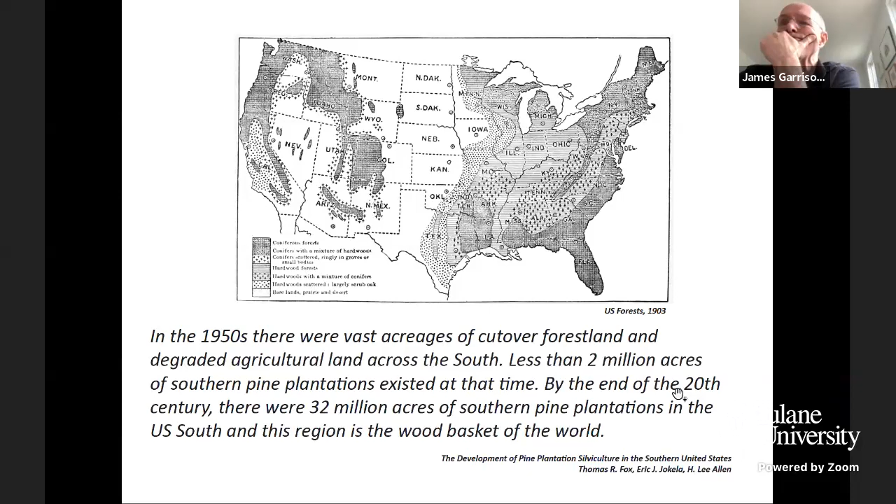But there are, of course, still challenges. And as many of you are aware, mass timber production had been located in Canada and the Pacific Northwest, as well as in Europe. But recently there's been a plant opened up in Dothan, Alabama, another one planned for Texas, and another for Arkansas, using southern pine. This is an enormously important thing for our region, which has historically been economically tied to extraction industries of oil and gas, with very little interest in carbon themes.

So clearly the confluence of this amazing natural resource and the amazing and critical challenges of the Gulf Coast, both in terms of climate and the economy, are sort of part of this. This slide shows some of the research that the students did, both in terms of understanding carbon sequestration, looking at various species and their coverage, also on silviculture. We also looked at some economic issues, which I think are important to be aware of, even though studio and architecture won't get as deeply into the economics as one wants to. Most of these forests are privately held.

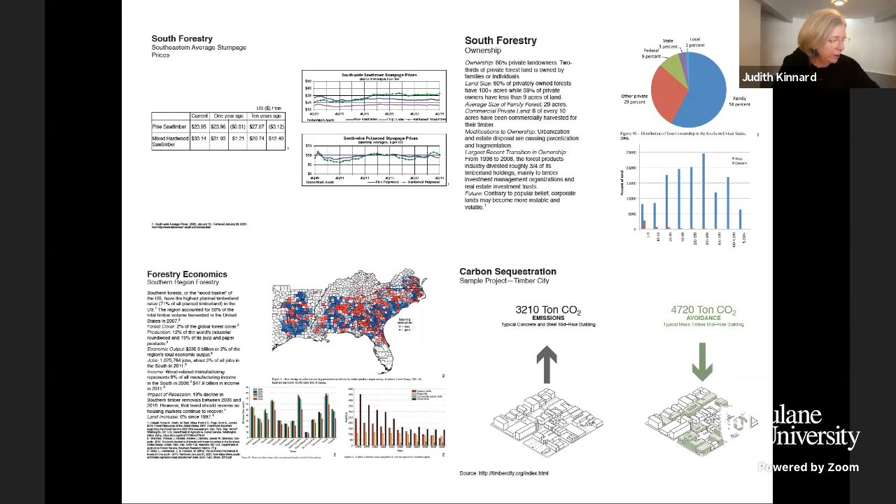So the hope is that mass timber, when it becomes more widely used, when incentives to make it more widely used start to exist, could help to stabilize some of those swings.

So the first exercise we did was a way of beginning to understand the system compared to the sort of iconic structural prototypes we're more familiar with. So we took some concrete houses, some steel houses, and even a couple of stick-built houses, and went through an exercise of translation—direct translation, and then eventually transformation—through a fairly rigorous dimensional lens of using mass timber, understanding it structurally, and in the last stage, one had license to make it really quite different from the original house.

Although I think the two examples—this is from Campo Baeza, a house in Spain, and this is a house by Sou Fujimoto, a house in Tokyo—both probably retain a fairly legible allegiance, although transformative in terms of many material aspects, to their original analysis.

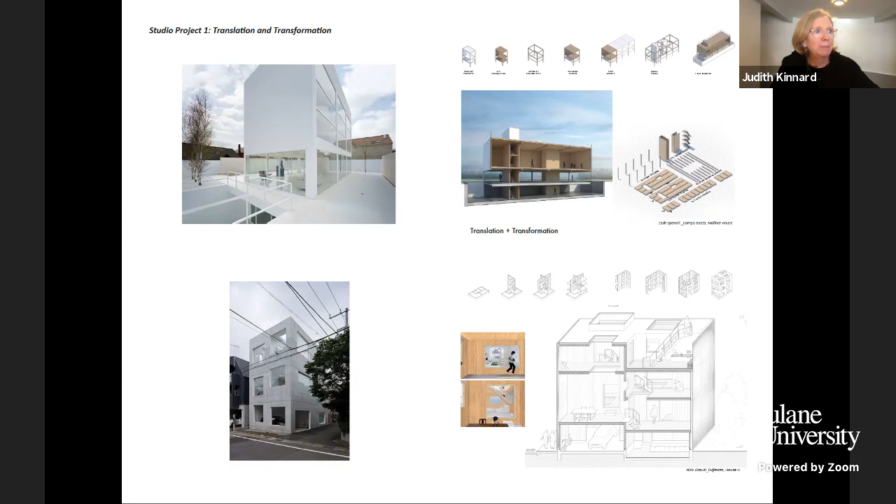We also had a couple of really helpful guest lecturers, friends who came to New Orleans, gave lectures, sat in on crits, and shared their knowledge with us, which I think I can speak for the students in saying was really valuable—Chung, who was the lead architect on the UMass project and also the Arkansas dormitories with Leers Weinzapfel, and Judith Sheine, who directs the TallWood Design Institute in Oregon as the director of design.

So in thinking about why mass timber in the Gulf South, there are those issues, but there's also something inherent in the material: the issue of time, and how, if you're going to sequester carbon, you manage to keep it sequestered for an adequate duration, how you deal with both the technical and biological aspects of forestry, and think about the life cycle issues.

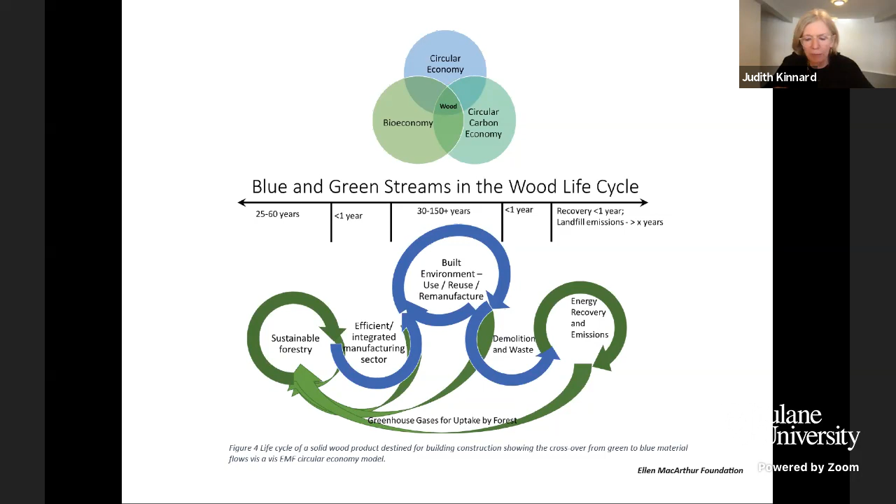But I was struck by an analogy in the history of our city. Throughout the 19th century, particularly the first half, farmers in the Ohio Valley would build these boats out of 2x12 pieces of oak from the forest. Those boats were designed to go down the river and never make it back up—they were dismantled and the lumber was sold, and our city was built out of that.

So many of the early houses in Louisiana, probably broadly, but certainly in New Orleans, were barge board construction—2-inch thick walls, no insulation, with cladding on the outside, no frame. That still exists in parts of our city, and it's an example of a resource that has now been intact and in use for over 100 years.

So it seems like a theme that can be seen in contrast to the situation in recent disasters in our area, where these mobile units end up scrapped after a year of use, maybe sold for a pittance, and whose material qualities are not necessarily healthful or environmentally sound.

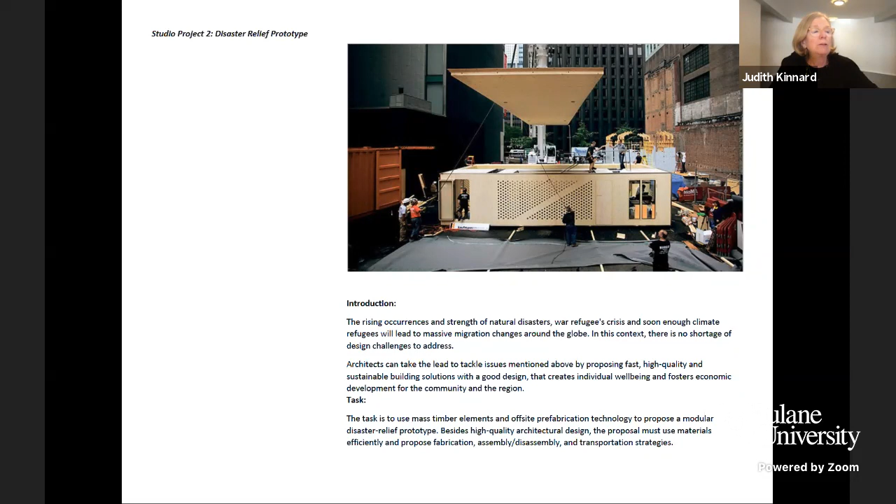So for the second project, after all of that analysis and research, right around the midterm we started this disaster relief prototype study. We initiated it with analysis of both small scale modular and flat pack units, and larger aggregates of flat pack and modular units, mostly European. After that analysis, students were asked to develop both a prototype and a scenario that takes into account the issues of initial use, reuse, and themes of time, as well as material.

You'll see that we scratched the physical model off that list, because by the time we really got into this exercise, we were in post-COVID remote teaching mode.

The themes of the studio originally were intended to be economic. We were intending to do rather specific costing, and there was a desire for some quantitative analysis, but it became clear that wasn't going to be easy, aside from the fact that it would be difficult to do accurately. No way is CLT going to win a cost-benefit analysis. Well, maybe a cost analysis, arguably a benefit analysis, possibly.

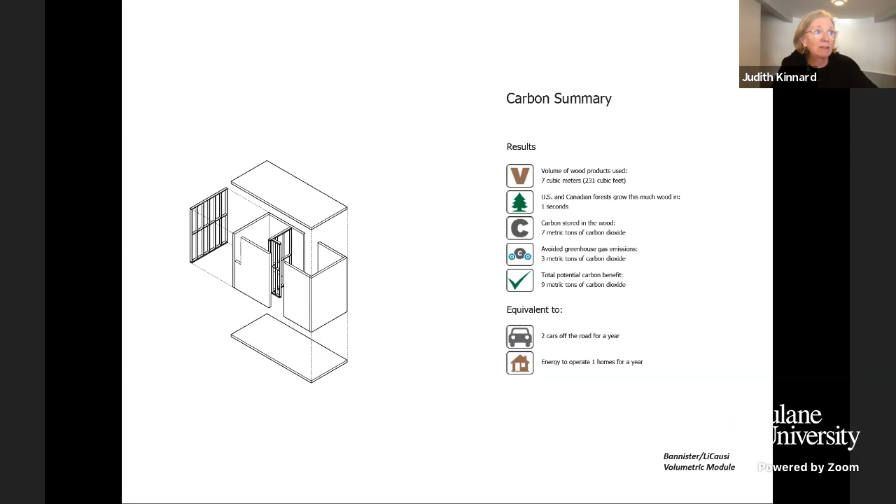So we did go through the carbon calculator for the various modules that people created. In a sense, through this analysis, it's valuing quantity in a way that usually you try to make buildings efficient by minimizing the amount of materials you use. But through this calculus, you're in a way creating an approach which values mass. And that seriously upends the equation that was prevalent in much of the early part of the 20th century.

And arguably in some contexts today, but it certainly brings a series of questions into play about what the metrics are, beyond the design metrics we associate with quality of space, in terms of what the metrics of cost and the metrics of benefit are. It brings a whole series of questions into play, which I suspect will come up today.

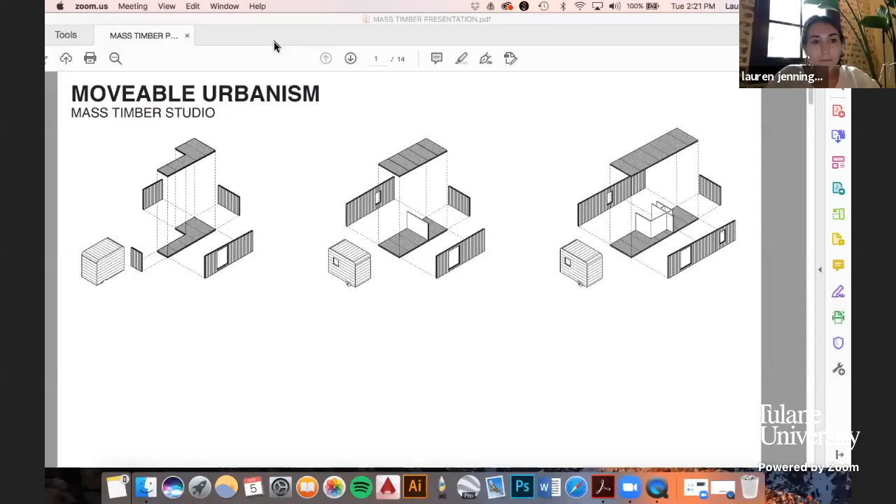All right, so my concept was movable urbanism. When thinking about this material, CLT, and disaster relief scenarios, I really tried to focus on how people can be relocated swiftly and how this material can be used over spanning timelines of short, midterm, and long-term solutions to disaster relief.

So when looking at the short-term needs for mass housing, the timeline and occupancy were very important factors to consider. Beyond immediate deployment, these relief units could also serve as long-term investments or until homes are renovated post-disaster. I chose working with a flat pack, which is what this diagram is, because it's more dignified than a disaster trailer, I believe. As Judy just showed, many of the materials aren't very healthful and a lot of them are just scrapped, which is very wasteful.

So the unit intends to accommodate and adapt to everyday needs in every phase of disaster recovery, and that is what these 3 units show at different spaces. This next slide shows the approach of the 3 dwelling prototypes and how they're designed to be compacted or extended, depending on the occupant's needs or site restrictions.

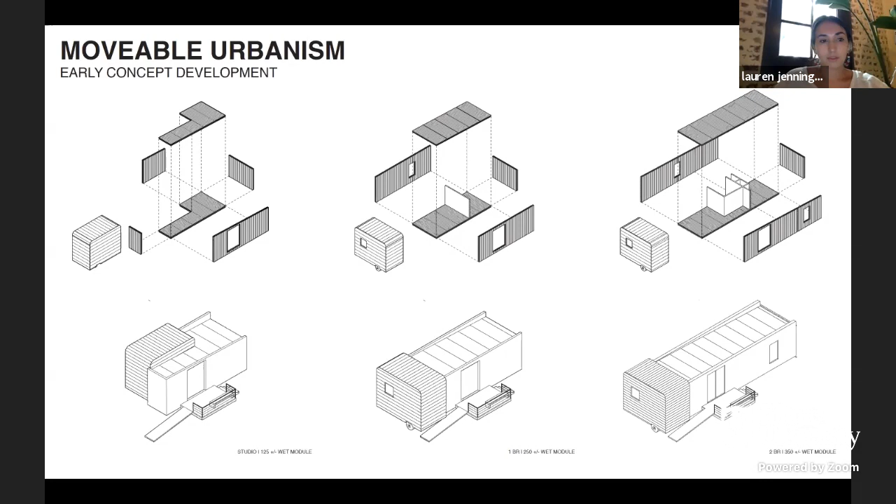And to completely transplant disaster victims would separate them even more from their familiar resources and opportunities, which could, as a result, create more problems than it would solve. Additionally, site limitations include and require electricity, water, wastewater access, and site access from existing infrastructure for proper deployment.

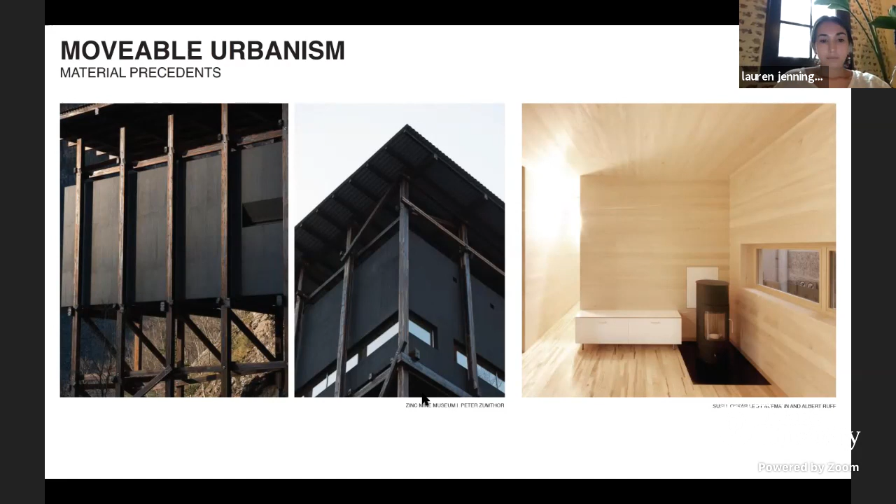The windows were thoughtfully placed to provide privacy if this ends up in a more public suburban space like a parking lot temporarily, or even if units are closer together, say permanently, on a private lot that's turned into multiple units.

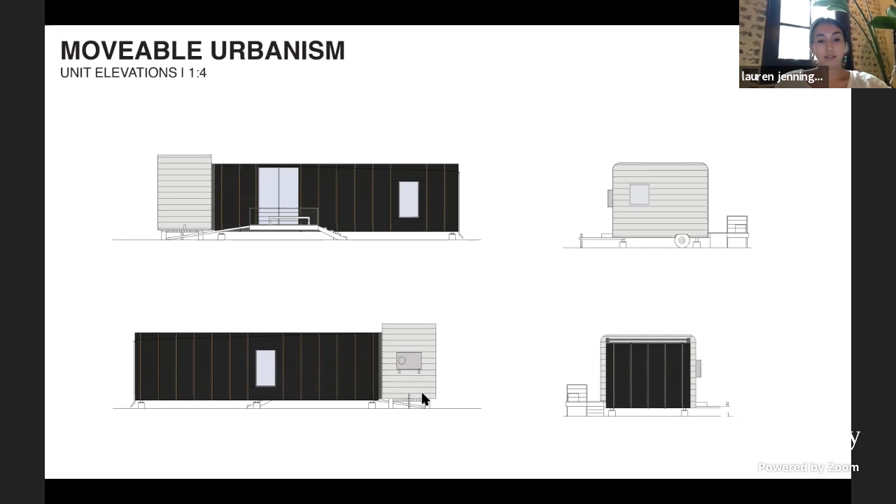This is the final slide, and I chose it because at the beginning we talked about how it was used to assemble these disaster relief modules, but it also reveals how the flat pack and the wet module can be transported again for reuse as a trailer.

That was the last slide, but I have a final video to show just to further explain how it is assembled, each layer.

And that's the wet module coming in on its own.

Oops. Okay, thank you.

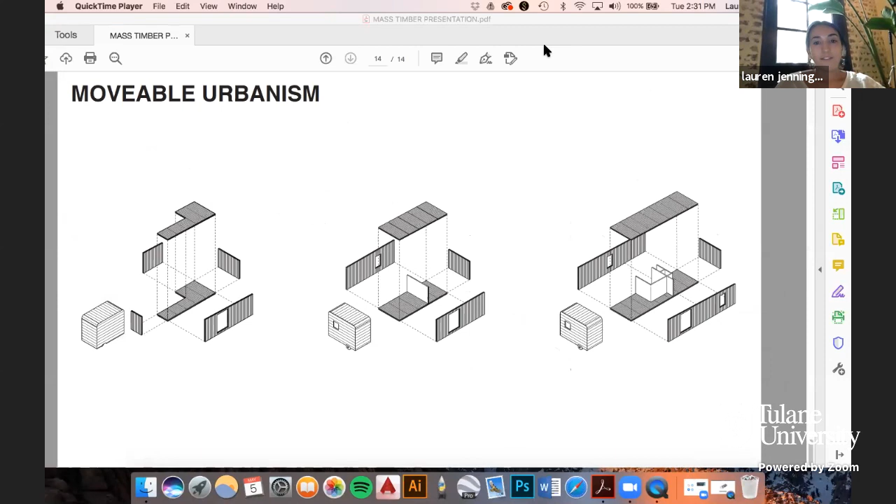Great. Thanks, Lauren.

Well, thank you so much, Lauren. I'm happy to jump in if nobody else does.

It's a real pleasure and a delight to see this studio unfold as a whole. I think the initial premises of the studio were really exciting for me to see. And I'm trying not to have my house included as part of that discussion, but just to see how the broader approach to the Southern Pine question in the South has been taken on and thoughtfully identified is really critical, because it's an emerging topic. I've been on a couple of studios in the South, and it's not often gone into as much depth as into the forestry plantation questions and the carbon questions as you all have. So I was really excited to see that as a whole.

Regarding the projects, it's just a delight, Lauren. This is a very thoughtful project. It seems very complete. There's a lot of care that's been taken. I was thrilled to see the wall sections, for instance, in the work there.

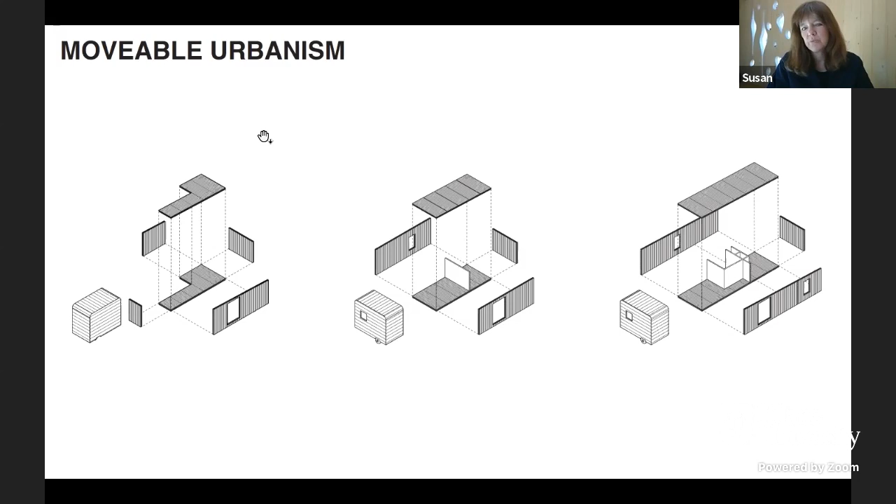If I had to start at a broader premise for your project, Lauren, I would have to question and ask you to expand upon the movable urbanism quality of your title. Maybe that's a bit of a red herring, perhaps it got you into some difficulties that you didn't anticipate, but do you really think your project is movable? Perhaps you were getting at that with that last slide in the video, but if you could expand upon that topic, I would appreciate it, because there's a lot of very good permanent construction or semi-construction about the project that I could talk about, but it's the movability part that's got me questioning a little bit.

Okay, yes, that really had to do with the ground connection and thinking about how flat pack could be moved. It was really between flat pack and modular, where a modular system could be placed on a truck and transported. But as a whole, it seemed a little bit more similar to maybe a FEMA trailer, where that's less personal, and that's something that multiple families have gone through. So having that same system that you might use in an actual disaster recovery scenario, deconstructed and then moved onto a different site, was something I considered for how this system would work. Here's that section that shows how the ground connection would not affect that temporary placement in a more public lot, thinking about how you're going to affect the space and how that would ease transport.

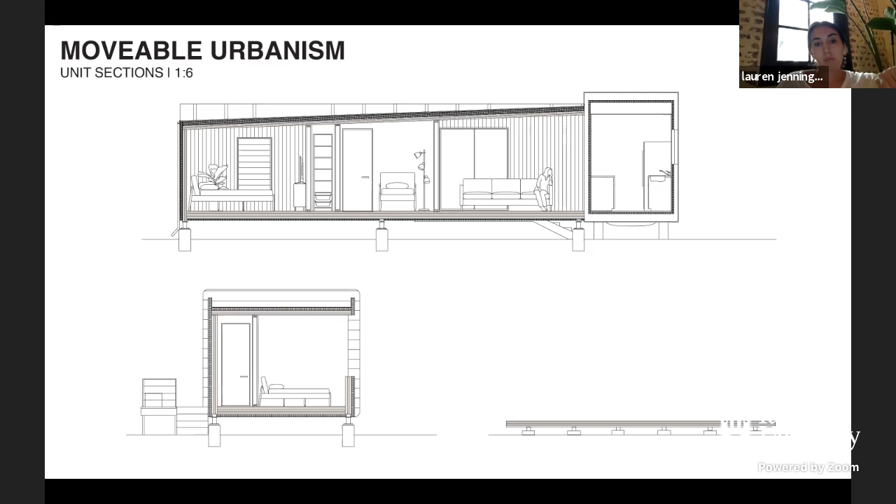Thank you, I agree it is a very nice project. But just on that last comment, it seems like the basic formula to do any kind of long-term analysis is the length of service for this, as you make a point of. So it becomes so important because the more material you use, the more carbon sequestration you're able to accomplish, and there's some value in that which gets cut off at the knees when it has unexpected ending points.

And the Katrina Cottage is a clear example of that. There was no thought about how to use it after the immediate emergency, and so we have parking lots full of those things. So certainly disassemble and reuse for its same purpose, but it also seems like there's a real opportunity.

To just continue to add on to this, to think about how you're setting it up. Maybe it's in the backyard of someone else's property, but also maybe it's on its own property, and someone in an emergency situation could be gifted this, or through some kind of service, and then be allowed over time as they reestablish their economic base to add on to that, to actually make this work. Because the beauty of mass timber is the material is of such quality that it encourages one to hold on to it, to take care of it, to last through that. So find ways where you can tap into that unique quality of the material and capture the one thing that could be unknown, which is the kind of super longevity of it.

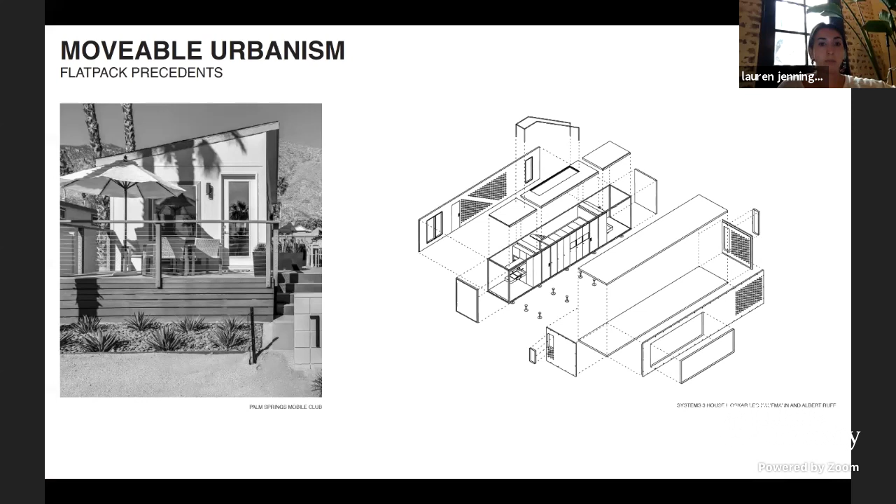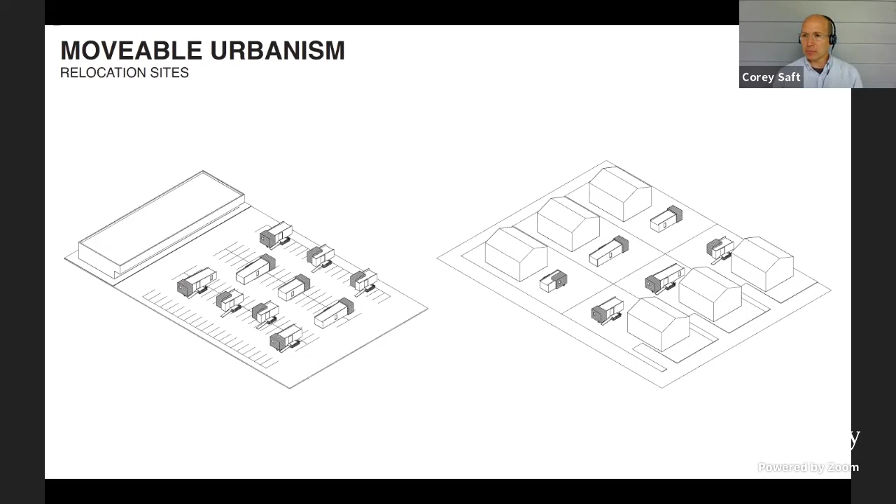Right. And that's a conversation that extends beyond disaster relief too. It does seem like the movable idea of your urbanism is, at least the way I'm starting to think about it, to always have a plan B. When something goes wrong, this thing has the capacity to rearrange itself, reconfigure itself. Might not be easily movable, but it's certainly movable in some time frame.

Which I think would question some of the assemblies for the insulation. When you look at the entirety of the project, you have this thing in a way—you have the mentality that the architecture is in some ways flexible, essentially assembled into an urbanism that is now more nimble. But I think you have to go back to the materiality and push on some of those components that are maybe problematic to the balance of embodied energy and high grade energy materials that are unable to be reused once deployed. A lot of those happen to be the insulations. So if the scale of materiality or the architectural form making has an agenda within the context of its full assembly deployment, I think you might find that the insulation is now your target.

I think that's a really great point, Corey, because once you start digging into that idea of disassembly, it's not just about the connections between these big, sturdy mass timber panels, but when you attach a mineral wool that goes screw-based into the mass timber, there's a lot of penetration happening also in the waterproofing detail. So all of that has to come off, and yet you still need that to protect the mass timber from weathering. I think it's interesting—if this climate of the South doesn't necessarily need protection from the cold in the same way, there may be some less insulative qualities that are necessary.

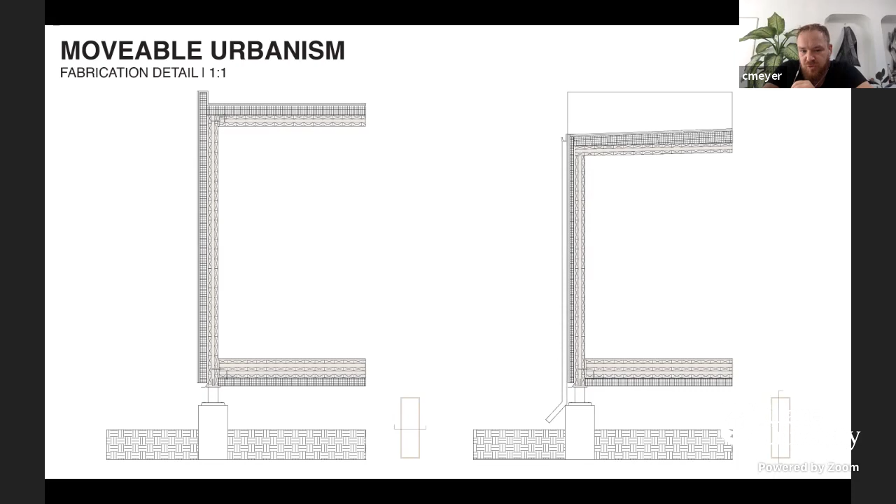I think that's the nature of the timeline, which is very exciting, and I think it allows for maybe one or two of these moments to be explored without being shackled to too many agendas. It's a great point in terms of how much we can really ask of this architecture. I'd point to interrogating the timeline relative to the objectives and intentionalities of the work, maybe limiting it to only trying to solve one or two types of goals. That gives you some leeway to develop a couple inventive or exploratory scenarios, which is actually helpful in school, where you're free and unshackled from that.

I agree. You're going to see a few different approaches to this, because the issues you've all brought up have been confronted by everyone in a variety of ways. I was trying to imagine how you could strap the insulation on without having to screw it in, with these big barrel vaults of things you could do on 16-inch centers or something. But in any event, if there aren't any more comments, we can move on, or if there are some other thoughts before we do.

I have just a couple more detailed thoughts. If we go back to the wall section, it seems like your parapet's built out of the insulation, and that might have some issue. And the platform framing of the floor system, it seems like just how that's attached — if it is like that, it'd probably need some more steel in there than the nails and screws.

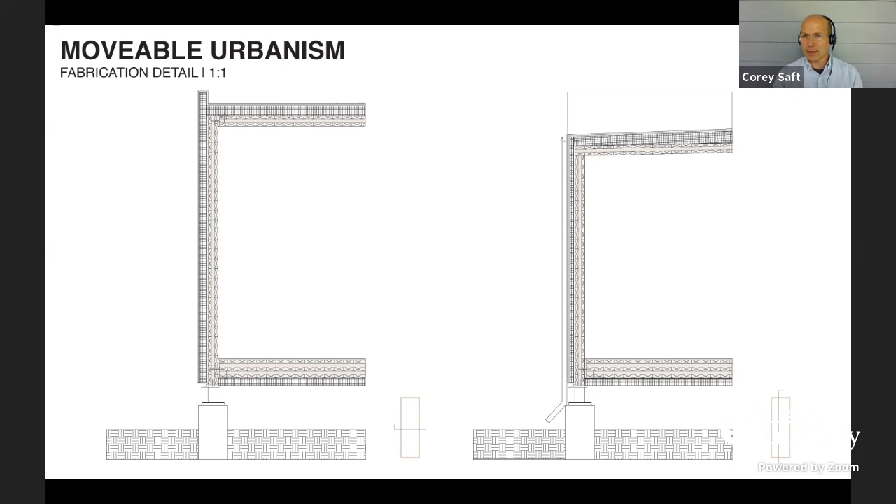The last thing is water management. It seems like there's more opportunity here, since you have this single-pitch sloped roof collecting all the water into one location. If that was reversed, so it went to your wet center, and the roof became some kind of cistern-like collection system, that would both slow down heavy rain before it goes into whatever system it's going into, and also give you a gravity-fed system for other activities. You're already working with water in that area, so in a way, make the roof its own gutter system.

That's an interesting idea, I love that — it gives you some opportunity. We had it sloping to the shorter end, but we eventually decided to maybe cover the entire roof with parapets and go to a gutter. So that's a good idea, I didn't consider that.

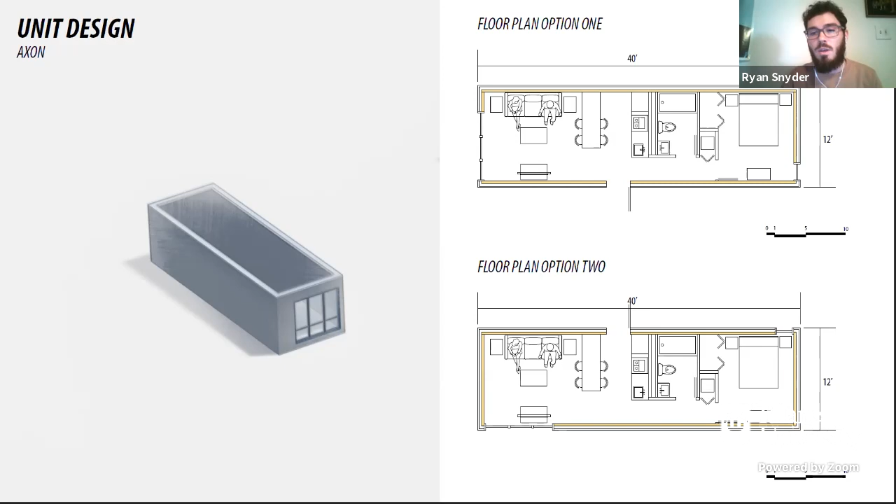I'll zoom in here to the plans. I'm also carefully placing these apertures on the ends of the CLT panels, highlighted in that tan color, to optimize the CLT cuts and avoid cutout windows that essentially waste the CLT panel.

In the elevation, I'm also utilizing floor-to-ceiling windows to make that full cut rather than partially cutting out of a panel. Here in the section perspective of the unit, this is the more vertically facing option that could even allow for some cross ventilation as well.

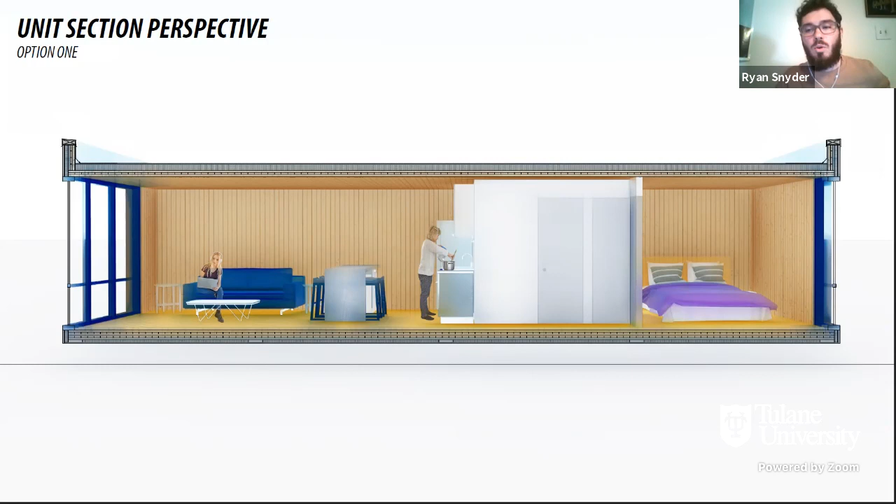As a precedent, I was really inspired by the post-disaster prototype by Garrison Architects. Obviously, James Garrison is here.

I selected this as one precedent to look closely at because the size of the units, as I specified earlier, were already made to be transported, and the apertures and windows were already using floor-to-ceiling height windows, which when converting it to CLT really made sense to study this unit.

Looking into some different scenarios that this unit could be deployed, obviously it could be deployed in a more singular fashion or in a row, more row housing fashion, and then getting into more aggregated and stacked ideas.

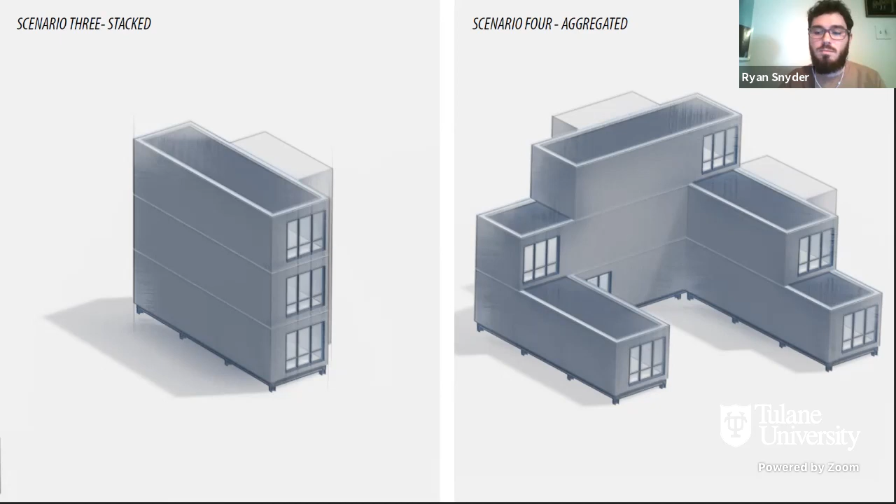On the left, a very similar scenario to the Garrison prototype, and on the right, utilizing those two different unit types to maximize a little more irregularity in the aggregation. So getting into the fabrication, I was thinking of these units being assembled in a factory, not as a flat pack.

Thinking about the post-disaster context of this project, I thought it was more important to have these units ready to be shipped out, really trying to minimize the construction process on site so that the deployment of these modules would be a lot quicker compared to a scenario where the project has to be built on site.

For transportation, this module takes up about almost all the space that a truck could use with an oversized load, really taking advantage of pretty much all the space that can be offered with the transportation and utilizing the standard CLT panel sizes.

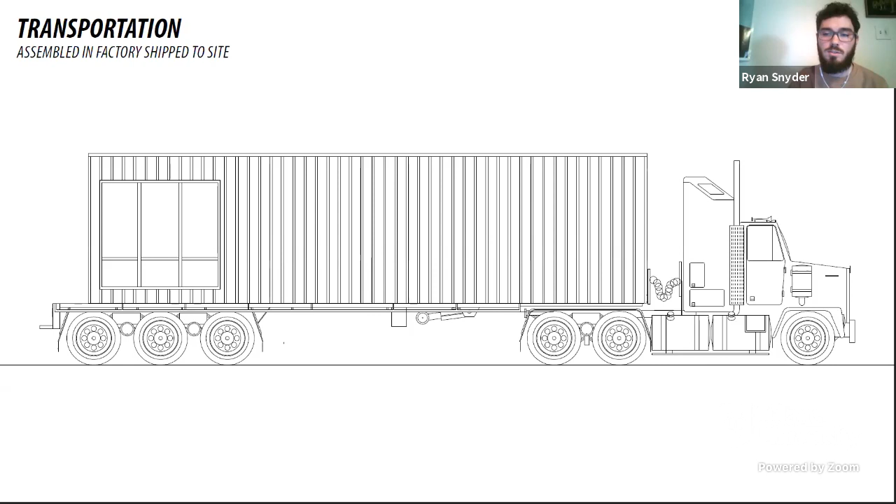After that, I began to think about different sites or contexts that these units could live in, because it's already been pretty well researched that these could live in a standard lot. So I began to think of different sites.

I landed on using stadia due to the existing structure and existing facilities that already exist in a stadium, such as electricity and plumbing.

We've also seen these sites become less used over time. There's a certain lifespan to these sites in stadiums, and there's always a decision about what to do after the stadium becomes vacant, essentially.

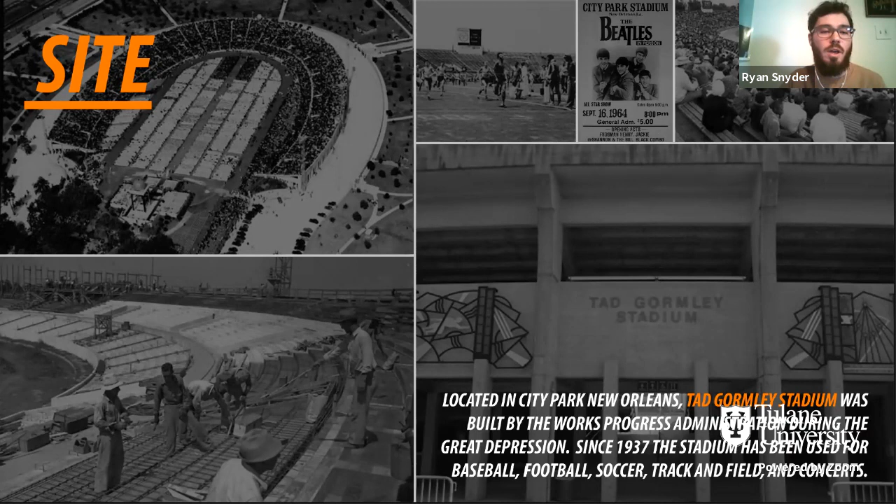Two, the concrete structure of the stadium allows for more weight to be added on than maybe a steel structure. The third reason was this open-ended stadium and access around the stadium provides easy access for construction and entrance into the site.

And then just some overall information: it's actually a state-owned stadium, and it was built during the Great Depression era by the Works Progress Administration. So thinking about how this stadium was once used to kind of get the economy going back during the Great Depression could again be used in a similar fashion after a disaster.

So here is a video that shows the aggregation. I started by focusing in on the entry points to the stadium, and then stacking these modules on top of each other.

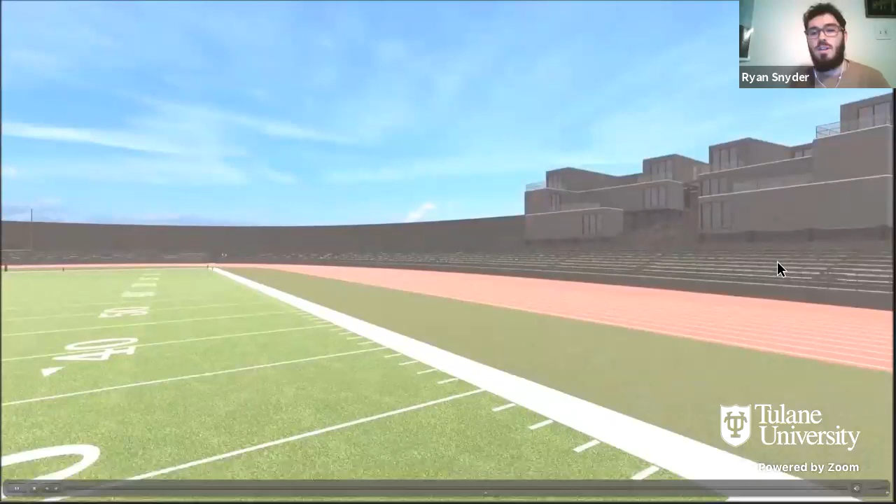As you see here, that allow for outdoor spaces and decks for units that are sitting on top of each other. And once I created a kind of standard grouping of these units, I then just kind of arrayed these around the stadium to fit that elliptical shape.

I'll play this again real quick. So again, focusing in on that entry point and kind of building the group of these units around there, kind of in a sense, creating smaller communities inside a larger aggregation of these units.

And then, as I said, arraying these around. And then the final phase is kind of transforming the field into a more communal area and an area that can be used for water management.

I don't know why it's, hold on. For some reason I had trouble going to the next slide.

As you saw in the video, utilizing that circulation down the middle and trying to pull these off of the existing entry points within the stadium.

Using this kind of vertical circulation through those entry points, and then horizontal circulation around on that kind of second tier of seats, and then again at the top, and then providing some stairs and elevators around that top circulation that can be used to provide an entrance for disabled and people that cannot use stairs to get up.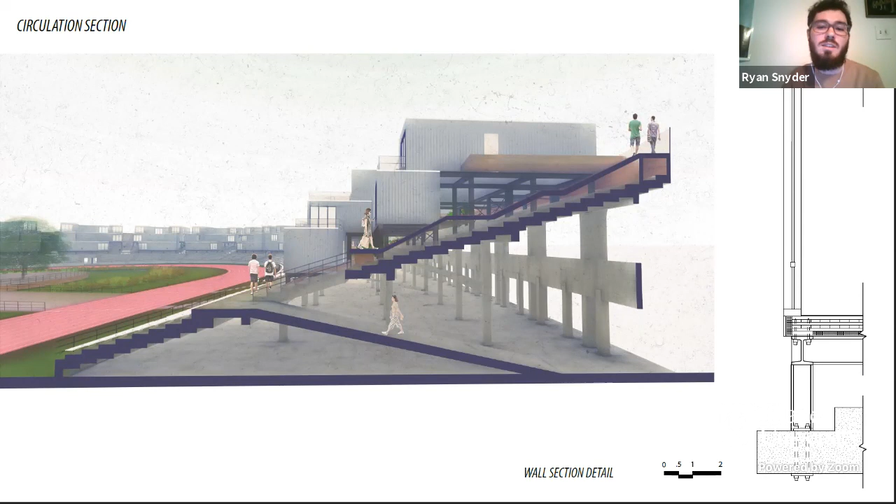So rather than trying to come up with a unit that could maybe sit on these steps individually, it made more sense to make steel frames and then sit the modular units on top of those frames and the units above. This is just showing the circulation and access into those units.

And then to finish everything up, just a few perspectives of the project. Here would be from that kind of mid-level of circulation. And then on here, showing the community space out into a little bit of the elevation of that grouping.

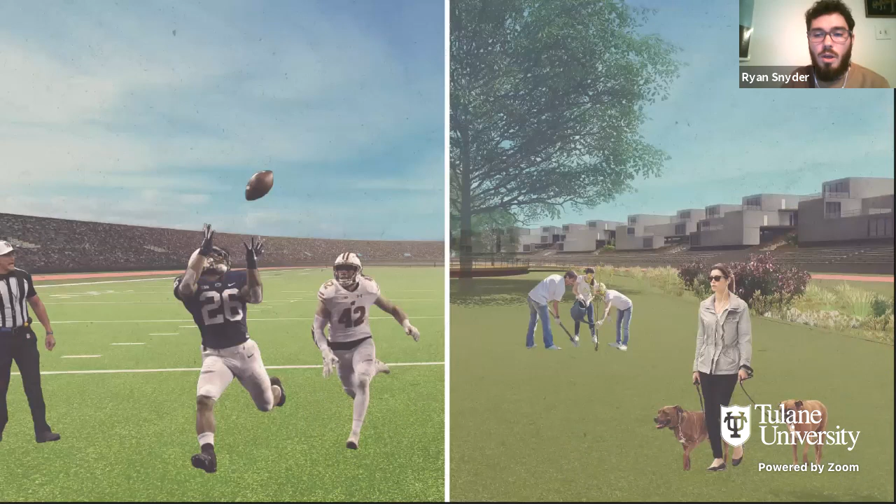And then as a final image, showing that juxtaposition between what this site once was and possibly what it could be. Thank you.

Well, Ryan, that's really fun. That's really something.

You know, what I really like about your proposal is that maybe without you realizing it, I'm not sure, but I think you probably did, is that you've tackled the necessity for infrastructure for any of these kinds of projects that you would need to deploy, right?

And when we think about prefabricated buildings, which we do a great many of, we usually think about a kind of 50-50 split between the cost of the building and the cost of the infrastructure. And here you have a kind of infrastructure waiting for you. That's quite an interesting thing you've taken on.

The thing that I wonder about is how far you could take it. I mean, presumably these are pretty robust structures, they probably can take quite a bit of weight. I'd love to know how much they really can take. I'd love to know if you could make your housing more dense rather than make it so porous with so many courtyards. I wonder if you could start to really capitalize on all the concrete that's out there.

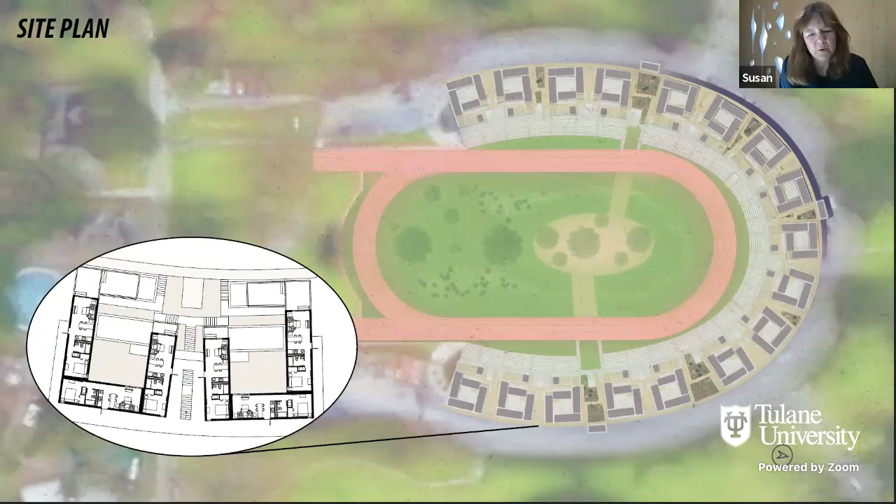And I think there's some real opportunity there. I can see in your big plan you've got some overall areas at the entrances, there's some community gardens potentially, but just that little spot right outside my window to grow basil, something like that, is really valuable for these kinds of homes.

It's just, when Judith was talking about this business of weight, the old 'how much does your building weigh' Buckminster Fuller business, I couldn't help thinking about that a bit. Because if you're building out of a material that soaks up carbon, well, it might make sense to use more of it, right? But the other side of it is that when you make weight, you make all kinds of problems for yourself.

And I'm thinking about Singapore, I was recently in Seoul for a housing conference, a modular housing conference. And the Singapore government was there, and they said, well, we refuse to make our buildings out of anything but concrete. So we're making modular concrete buildings, and we're making them 50 stories tall. You can't imagine how much trouble they were having. They couldn't find cranes, they couldn't get foundations deep enough. They just had horrible problems.

And when you make something heavy, you have to move it, you have to hold it up when it gets to the site. A lot of negative aspects come with weight, I think, when you're building in these dense conditions. So I wonder about that.

And I also wonder about the way we use CLT, particularly in something like this, where you have point-loaded conditions. Something that's been evolving from our research work at Pratt, we've been using CLT as infill between steel frames, among other materials, to look at ways to simplify connectivity, simplify the manufacturing process and the assembly process. This idea of hybridization, which goes counter to the modernist ethic of literate material use, let's say, is really an interesting question with everything that's on our plate these days.

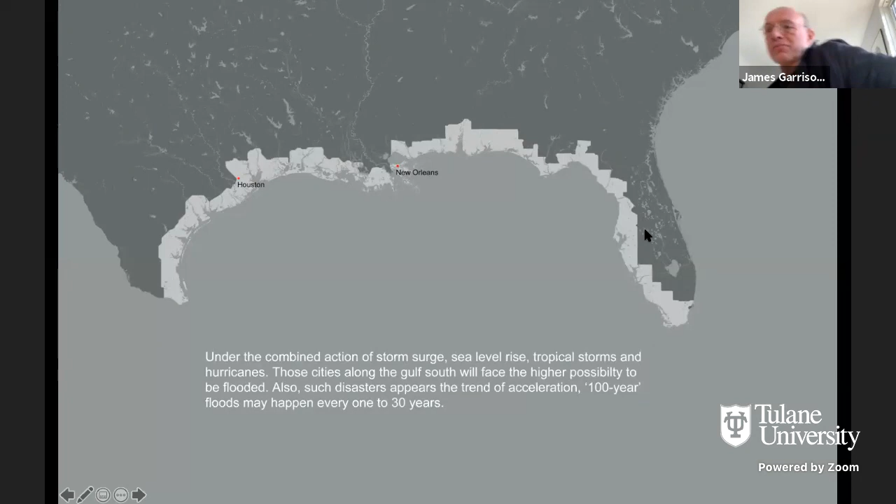The second slide shows the flood map in the South Gulf. Under the action of storm surge, sea level rise, tropical storms, and hurricanes, the cities along the South Gulf face a higher possibility of being flooded. Also, based on research from the University of Pennsylvania, 100-year floods will happen every 1 to 30 years based on temperature and weather changes.

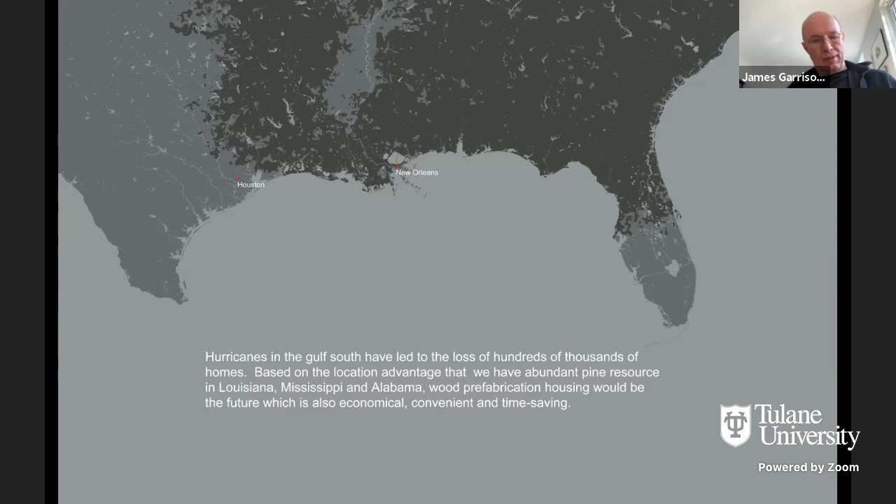This diagram shows the whole route for the project. We get the material from the pine forest, also make the CLT panel in the factory, and transport it to another factory to make the modules. I also chose the sports field to be my site, and after that I will donate the housing units to the homeless shelters.

In this way, I want to say we will take the CLT panels to be prefabricated in the factory, because we are doing disaster housing - it's kind of an emergency situation. So construction time is very important, and prefabrication will save a lot of time.

I see the sports field like in the campus or maybe in other areas. Schools were shut down during the hurricane times, so we're gonna make full use of the space. I will place the modules, the housing units, in the sports field. Our disaster housing is very temporary, so when the school is coming back, we can move the housing units and donate them to the shelter house.

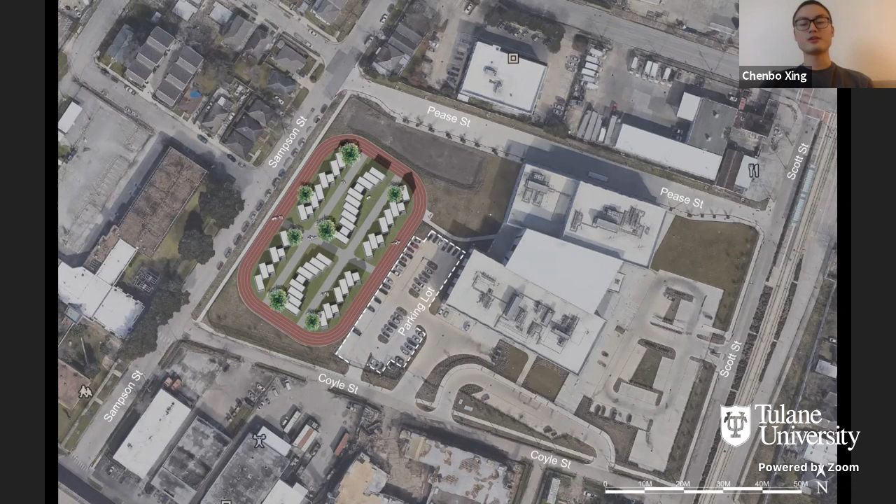The first point is I put the housing units in these directions so I can get some green space, kind of a semi-open space, which is the connection between the public space and the private space. The orientation and direction of the housing is also based on the site itself, because we have a parking lot on the right side, which is kind of a gathering space.

A lot of people will be there, so I do not want people to have crossed sightlines. So I made the direction this way. Also, I don't want the people living there to have crossed eyesight lines, so I put the middle line of the housing units in this way.

That's the analysis about the housing units. This next one is a fly-through video of my whole property.

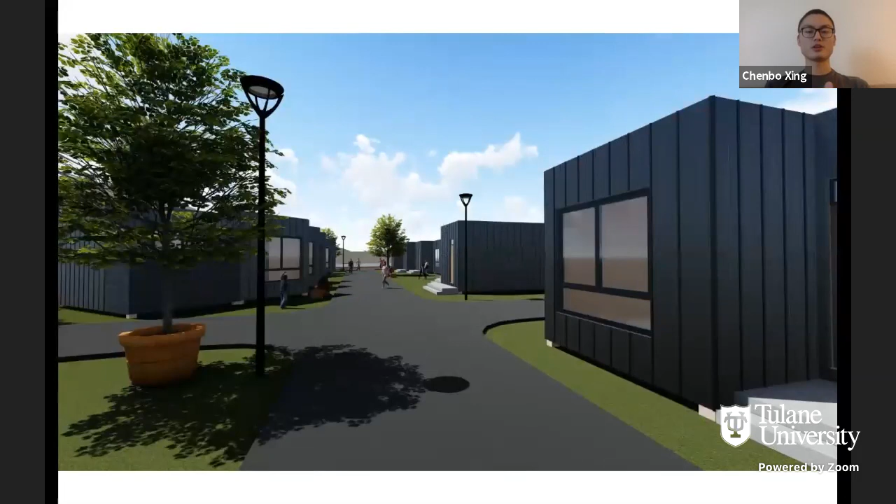Also, the housing units are not attached to the road or in the same line—placing them in different locations creates some green space or gathering space for people living there. I think when people are living in disaster housing, those kinds of units can offer a space for gathering and talking, because they do not have a job or school, so they have more free time.

That's it. Next slide shows the modules. This is the first module, and also the exploded view.

The first module plan is very close to a hotel plan, which is very space efficient. The living room and bedroom are very combined—you can see this is a mattress fixed on the wall. During the daytime it's a living room with a sofa and coffee table, and at night the mattress is laid down over the sofa and coffee table, so there will be a bedroom.

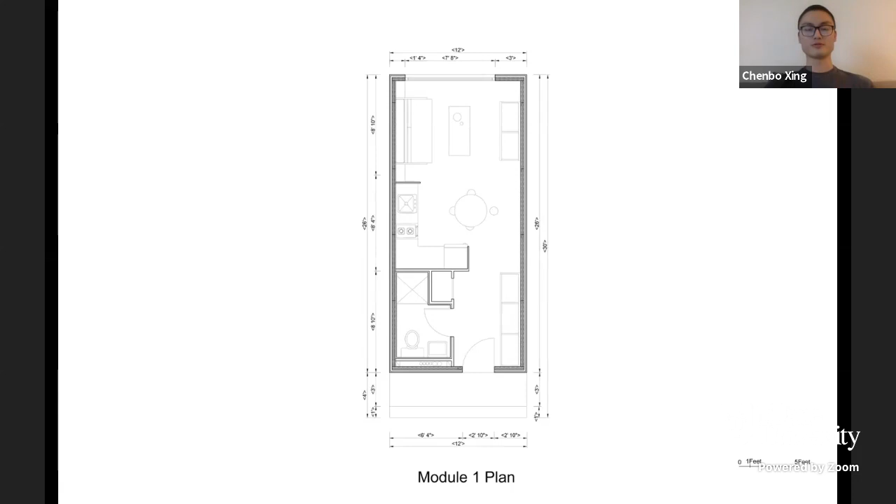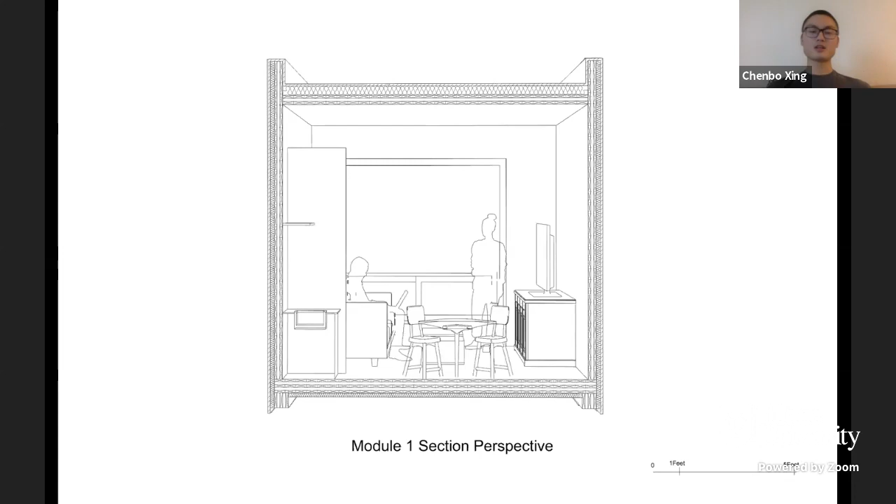This is a section perspective showing the activity in this space, and this wall separates the kitchen from the living space to prevent oil or water from spreading.

This shows the fabrication of the module, using 3-ply plywood for the walls and ceiling, and 5-ply plywood for the floor. The 3-ply plywood would be 17 panels, with total usage of 1,224 square feet, and the waste for doors, windows, and others will be 154 square feet. The plywood for the floors will be 5 panels, with total usage of 360 square feet, and waste of 48 square feet.

This next slide is a carbon summary for module 1. The whole unit for module 1 is about 12 cubic meters of wood, equal to 3 cars off the road for a year, very similar to a home operating for 1 year. The whole unit for CLT weight would be about 13,700 pounds, and the cost for module 1 would total 38,000.

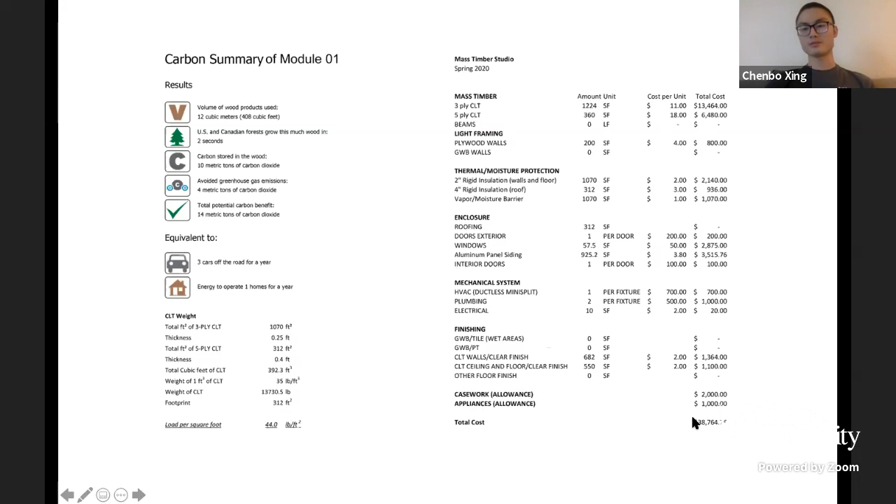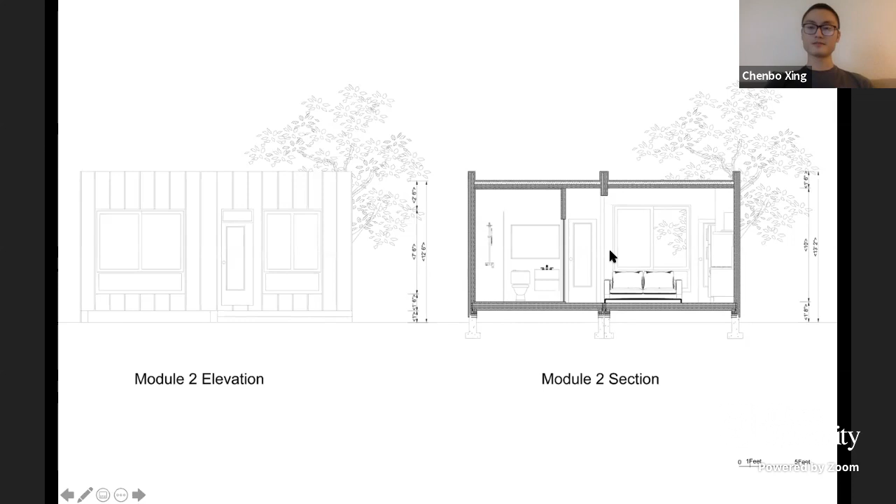This shows the elevation and sections, because this is prefabricated at the factory, then transported to the site, and the combination is finished on site. So it will be transported as a bigger one and a small one, combined on site. This shows a section perspective for module 2.

This is a video of the fabrication process: the CLT panel, the insulation, and the outside finish.

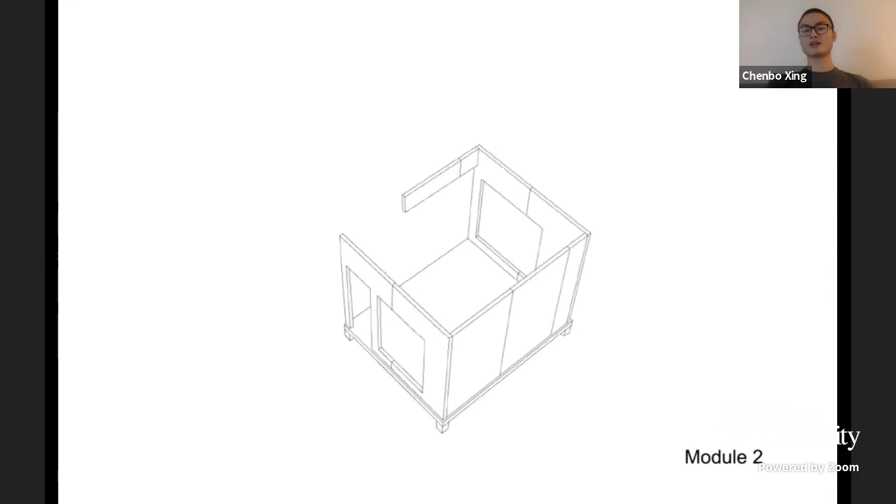The big box, and this is the small box for the other side, the relatively more public space like kitchen or living room, then combined inside.

This is a detailed drawing for the modules, showing the connection between module 2's two modules, and how the facade attaches to the structure, like the CLT panels. This section detail drawing shows how the windows combine with the CLT panel structure.

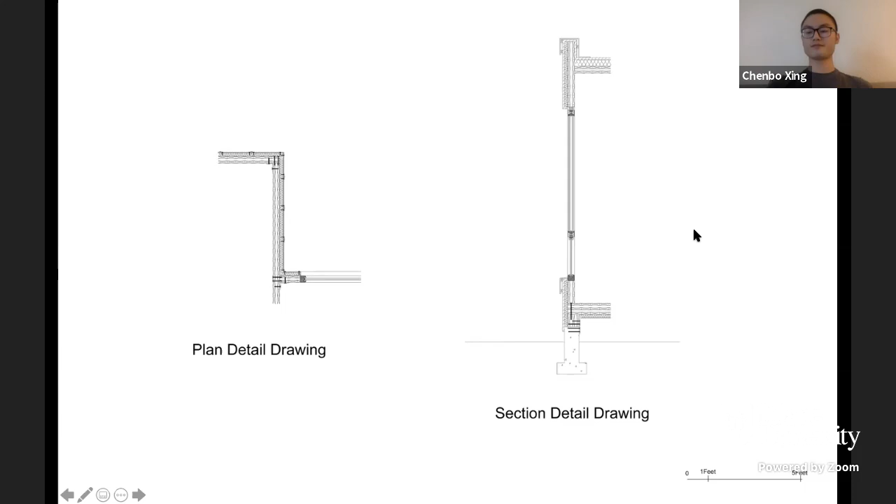Also, since my site is in Houston, Texas, based on the DMV, the Department of Motor Vehicles, they allow a single trip for house moves extending to 20 feet.

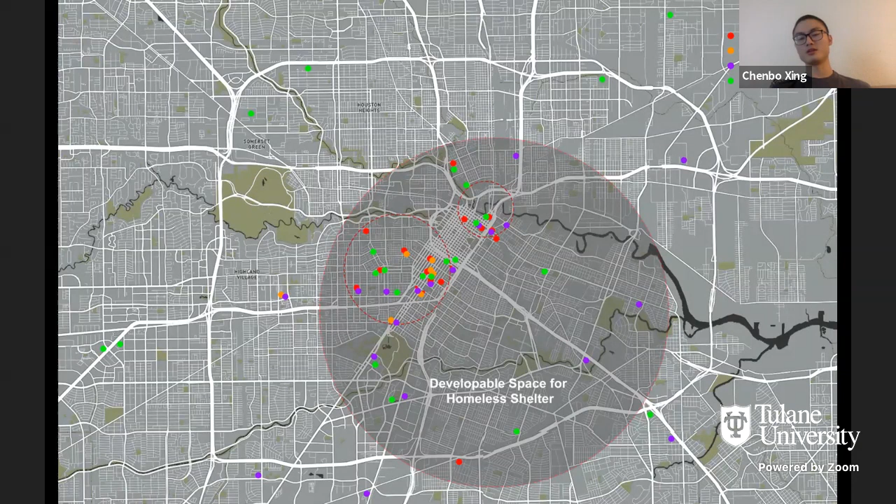This is the site, a homeless map showing shelters, clothing, food, and medical services. The big circles show where homeless points are concentrated in the downtown space, and where there are clusters of clothing and food, this space can be used for some shelter space. Thank you.

Susan, I think you have your mute on.

I have to ask you, thank you Corey - what would be different about your project if it was not in mass timber, assuming the volume is the same? Obviously your wall sections would be different, but could you talk about what mass timber added to this project? It's a lovely investigation into how we address portable housing, temporary housing, and potentially housing for the homeless, in this case Houston.

It's similar, but because of the disaster housing situation, it's an emergency situation, so the modules need to be fabricated very quickly and moved to the site. Mass timber saves time in construction. Second, based on our location close to New Orleans, Louisiana, and Alabama, we have a lot of pine forest resources, so this would be very economical. Those are the two points for this site and design.

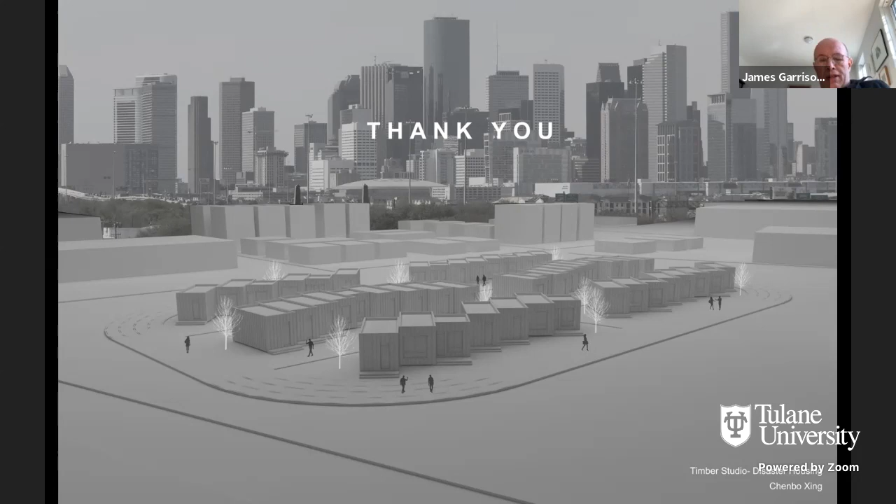Chenbo, you touched on a lot of issues. I was going to build on what Susan was saying - the architects and builders are one side of it, then there's all the people who have to make this housing. I was interested in your first diagram showing the surrounding forests and lines coming into the city in some way. This product is being transformed from something naturally occurring, or farmed at this point.

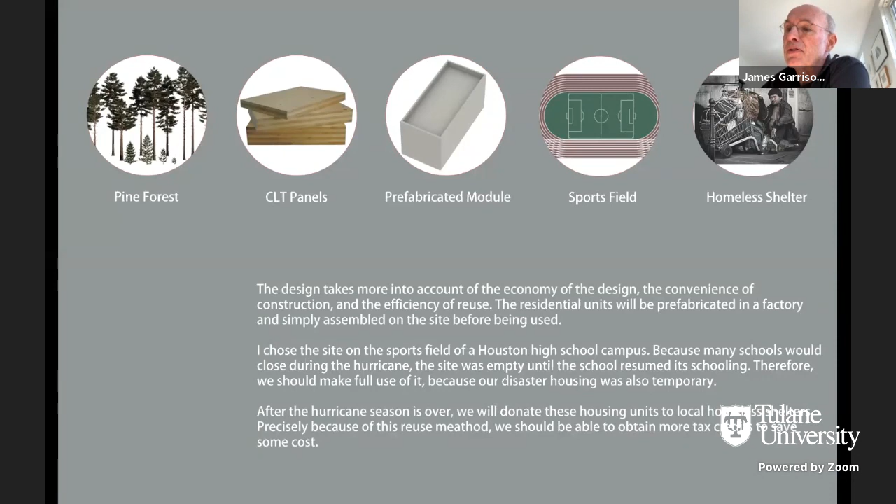But in any case, it needs to be transformed, and there's a big question - where does it get transformed? What are the labor practices, machinery, training involved? Because the funny thing about this whole prefabrication process, which Susan was talking about, is it doesn't stop with working drawings, or in the architect's or engineer's office. It requires deep collaboration, and once you start down that road, you can't help but think about the labor required to assemble it and how that labor is trained - its potential for transforming labor practices and workforce potential of any neighborhood.

So can you make your own housing? Can you imagine a prefab - could you have the CNC machine and a semi truck, load these panels in and make them on site? Can you imagine how many ways you can empower people to make their own communities using these kinds of techniques, making them transparent, simple, and affordable?

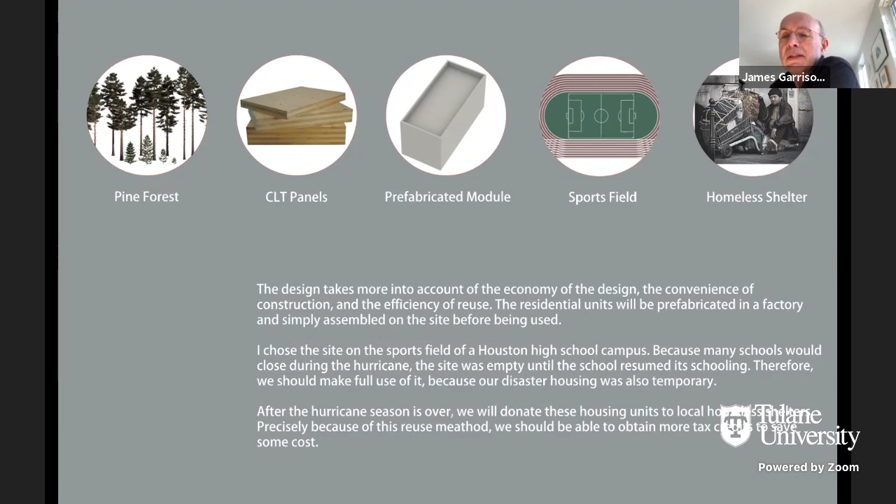Yeah, Chenbo, I think that's really... go ahead, Corey. Just following up on that, I want to talk about your site selection a little bit, and I'm thinking about the last image that you showed.

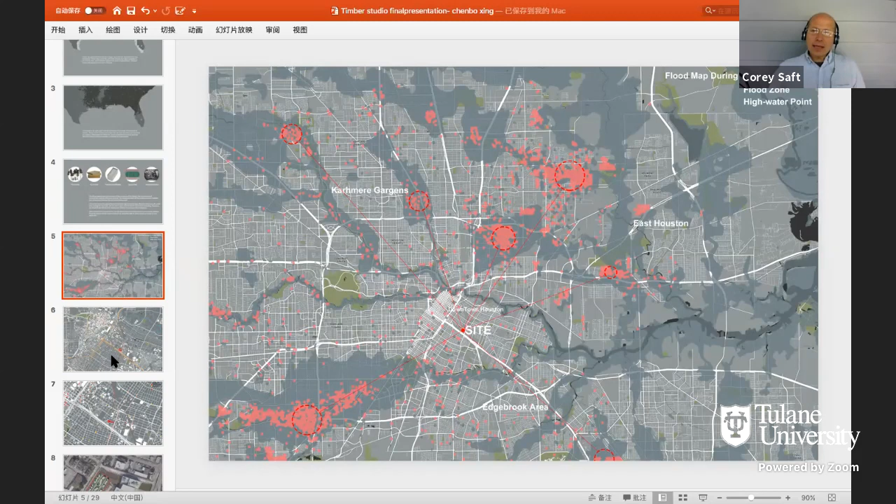The very last image—you have this, what seems, and I might be wrong, a real urban problem, the kind of homeless issue. You've chosen one of the larger cities of the country, but the deployment of your pieces and the location you chose, with the city in the background, seems like your strategy has been largely a suburban one, for large open spaces on the perimeter of the city. I wonder about the mating of the larger site selection of Houston, a sprawling city, so there's an argument that this suburbanization happens inside the city. But the image here seems to suggest it's on the outside, and so there's a political question of how we deal with the homeless situation, which is exacerbated in an urban situation.

I just wonder how far you've taken your thinking about that. In studios, homelessness and affordable housing is a tricky thing because housing just costs what it costs to build. A lot of the solutions to homelessness and affordable housing are matters of politics, economics, and social networks inside cities that allow certain services to be granted. So it seems like your large idea is addressing homelessness and ultimately affordable housing—can you talk about the choice of being suburban and how this addresses that issue?

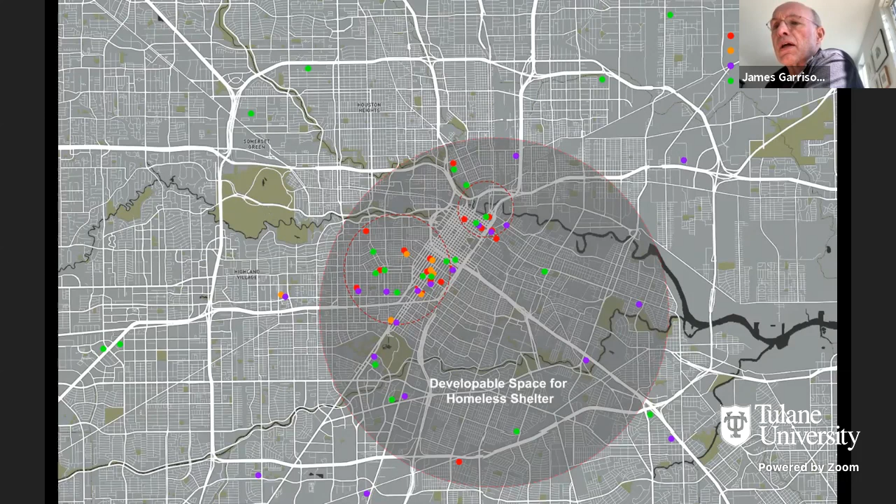But Corey, I think you bring up an interesting point. The choice of form or planning choices made here, down to the idea that the units are rotated in an attempt to disassociate themselves from the collective, to have a kind of individual view that is singular in some way. There's a funny approach here. Chenbo, you could have thought of this as communal, in the sense that the units added up to a kind of identifiable precinct. But this has a highly individuated character, where there's not a lot of concern about whether or not it adds up to much. I think one of the things about homelessness is this rootlessness, this lack of focus and community that comes with the territory. So I think that's something to really reconsider.

I also think the infrastructure that would be necessary in the middle of this field would render it rather expensive and inoperative in the end. So there's a very interesting question about communal structures made from transportable structures.

Well, let's go on to the last project. Finish up comments and then we'll move on.

I was just going to comment on some of the statements James made regarding infrastructure. Now that we've seen three of these, there's a question about the nimbleness or flexibility in the CLT architecture DNA and its capacity to be reassembled or reconfigured for multiple sites. As the urban condition is the test bed for deploying these architectures, it seems like the urban setting is going to be the thing that's more fixed or difficult to deal with, while the CLT architecture DNA gives us the moment of flexibility.

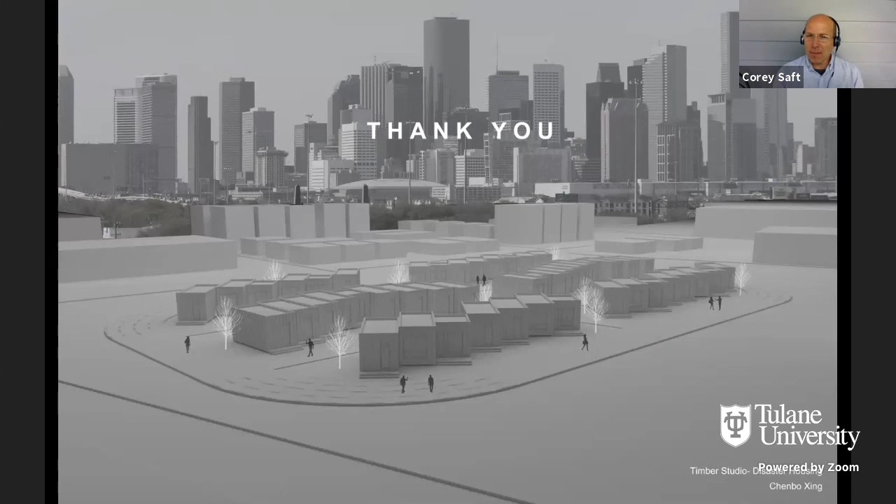It seems like there's some smaller scale stuff that could be brought into the stadium, while some of the larger scale stadium stuff might be deployed over here, and that may give the kind of variation that's deserved within these contexts. It does seem like the site locations and emergency temporary shelter requirements suggest some version of a loose fit, long life strategy to match that infrastructure. I'm not sure what that is in each case, but right.

When we look at the 8 projects as a whole, and sadly each group only gets to see half of them, they definitely fall into very different categories of what it means to stay or what it means to move. I think grappling with that question underlies what James was saying earlier about potentially multiple, and potentially competing, criteria that come to bear. But I think that also makes it more engaging. Effectively, people have designed something about 500 or 600 square feet or less, so the design of the module itself is only going to take you so far -- it's both its materiality and its role in a longer term time frame.

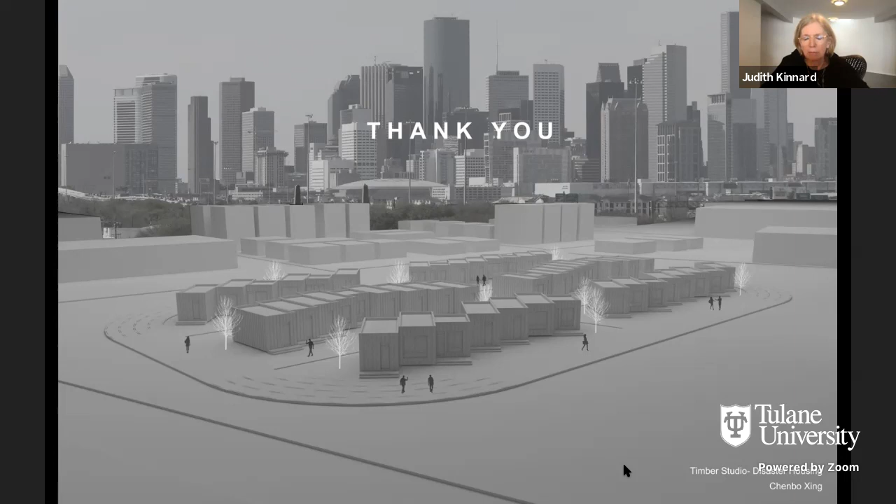So we have a very different site condition in our last project, which is many things, but urban is not one of them. Hey Judith, one thought comes up: if there were two components to this effort, a kind of chassis or substructure that contains all the infrastructure pieces could have built-in services and so forth, and it would leave you a certain amount of flexibility in terms of what you put on top of it.

It'd be very interesting, a kind of hybridized, pre-constructed set of elements. It's more like a mobile home where the chassis lives with it and potentially moves with it. Or the chassis could be something that makes a platform, an infrastructure with all the piping and connectivity, and then you do what you want on top. An urban proposition as opposed to a singular one.

Like the open building systems. Yeah, exactly. This is very interesting when you think about it through the CLT lens. The nice thing about that is it offsets the infrastructure to a larger scale organization, like a governmental organization that could do that wholesale, and then you drop in the modules for living on top of that. Yeah, nice idea.

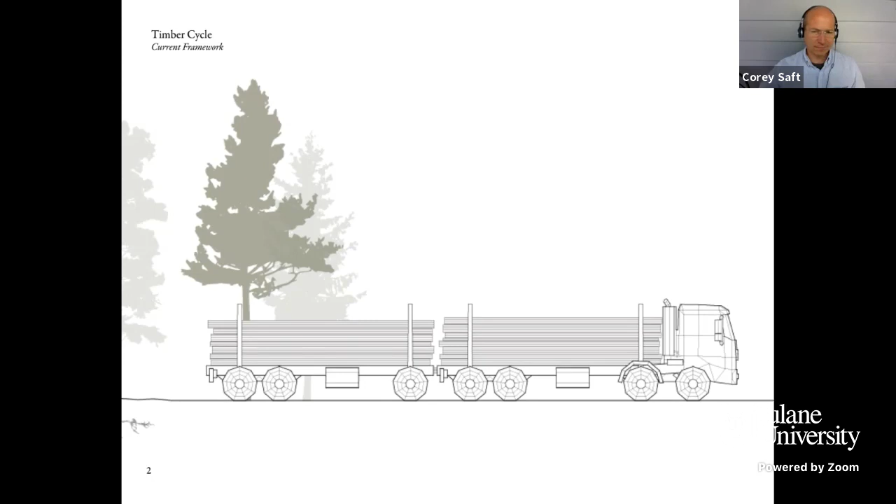This video is articulating the traditional framework of timber that we're all fairly familiar with. Timber being logged, brought to a factory, typically turned into 2x4s, and then eventually used for residential homes. And that ultimately usually ends up as waste.

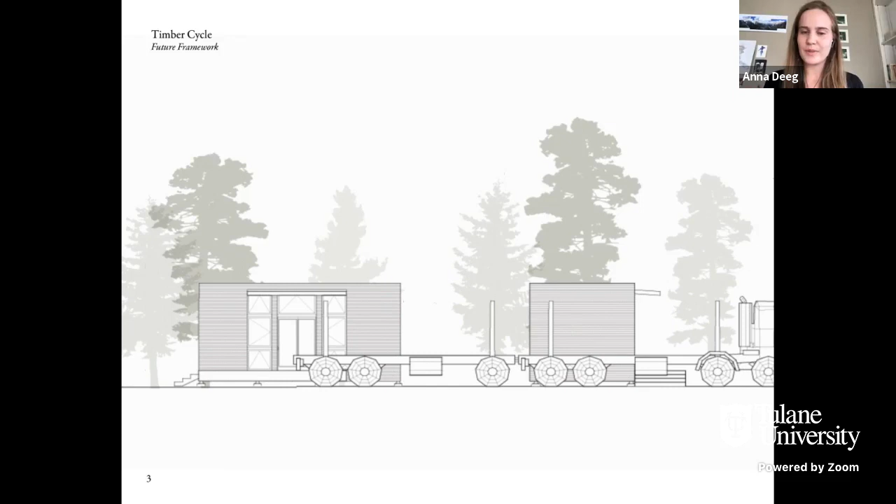Our project, on the other hand, starts off the same way, logging the same timber and bringing it to a CLT factory like everyone else. Our project is different in the sense that we're bringing it back to the forest, as you're about to see. There's a step between the CLT plant and the factory to make our unit into a volumetric unit. But essentially, we're going from the forest back to the forest to create a circular economy.

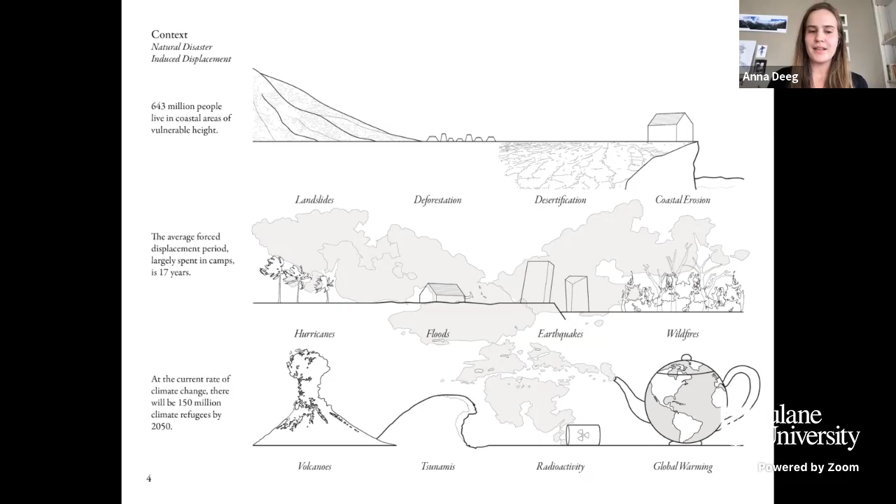With that in mind, we began to question this idea of temporary. As others have already touched on through looking at other projects and raising these questions, we began to think that really there isn't a temporary solution. There is an immediate disaster relief solution that we wanted to address, but ultimately this is a permanent problem that is only expected to get worse.

Bringing it specifically to the Gulf South, to Louisiana where we are, and Florida, these coastal areas obviously have a lot of worry with sea rise and subsidence, but the entire Gulf South will experience more natural disasters that are increasing in intensity and frequency.

Another caveat we didn't necessarily focus on ourselves, but I think is super interesting: over 99% of the most socially vulnerable people live in areas unlikely to be protected from inundation, compared to the least socially vulnerable group in the Gulf South, where only 8% are in areas unlikely to be protected from flooding. So there's definitely a social and environmental justice aspect to relief housing that's really important to address and think about.

So when looking at the individual module that would be deployed as an immediate response, we were really interested in this notion of expansion, which goes back to the idea of permanence - how this module can expand over time and be used on multiple sites, whether deployed immediately for disaster relief, which is what this unit would be used for, or placed on another site where other configurations can be shown.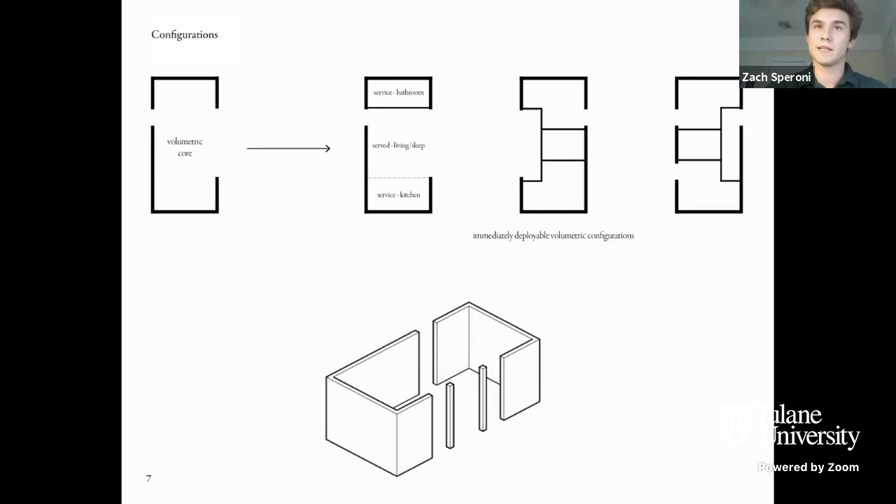The sizing of the module is 24 feet long by 12 feet wide, so you're able to get 2 modules on a 48 foot truck bed, and some efficiencies come from that when you're immediately deploying the unit. We're going to get into these different configurations and how they can be arranged, but this idea of growth guided the concept of having two CLT brackets with glazing in the middle that can be taken out and used as a circulation path. Thinking of growth from the module, we progressed from there.

So this is the actual plan of the unit. As Zach just mentioned, the windows are all floor to ceiling, so we're not wasting any CLT, and it also allows room for that growth and expansion that he also just mentioned. We also wanted to have the entrance from the side, just so that the front could have a little bit more privacy and allow for both ends of the unit to be fully used.

In the middle is the living and sleeping area. So in this first immediate iteration, that would essentially be a studio apartment.

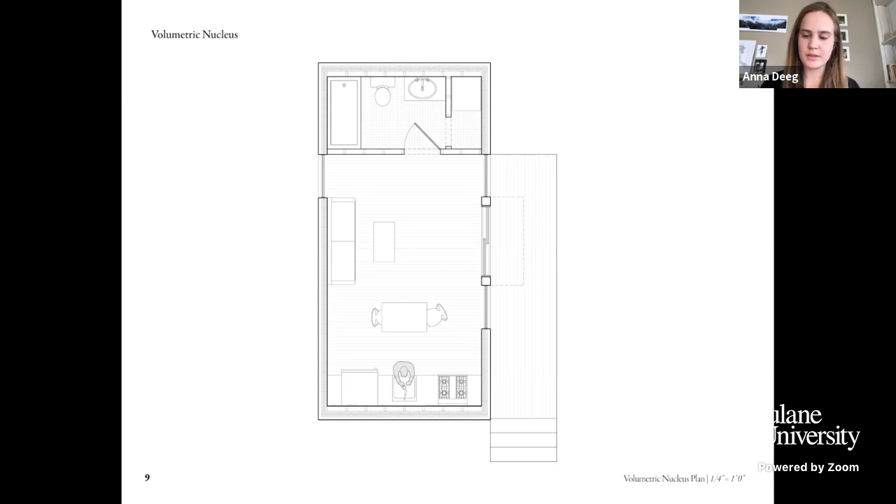And so this is showing a little bit more of those CLT panels. Like I just said, they're optimized so that we're not cutting into any CLT at all. They're all just kind of those two U's put together with the interchangeable floor to ceiling wall/door units.

We also put in, as you'll see in the other configurations as well, here it's just in the bathroom, those interior walls that are a little bit more flexible, all made of 2x6 studs. This is to reduce the price and also to allow for any and all plumbing, electrical, that sort of thing.

This is just a little bit more of a breakdown of the materials in the wall assembly. Fairly typical, as I was just saying, those stud walls house the plumbing, and then the CLT is beyond that, insulation, a water barrier, and then a rain screen, and our final finish on the end.

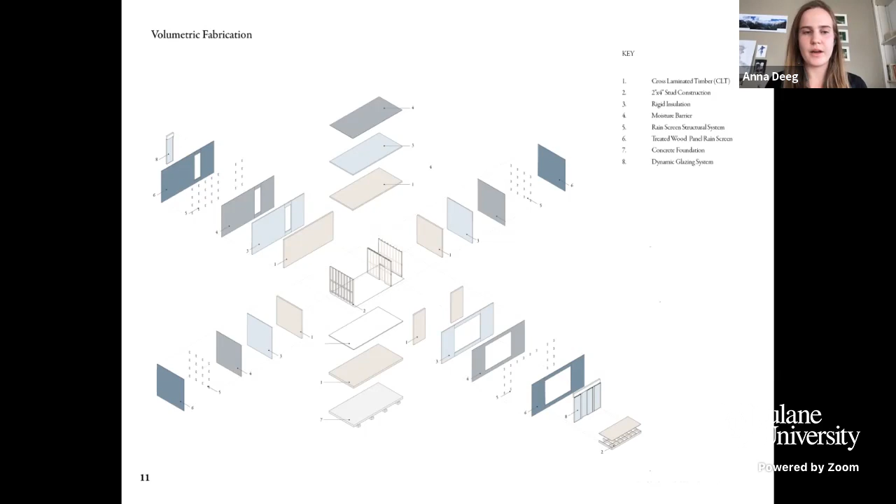So our scenario revolves along this timeline of the current day standard of disaster relief housing, placing a unit on site and using it as an auxiliary unit while the resident rebuilds their house or gets back on their feet.

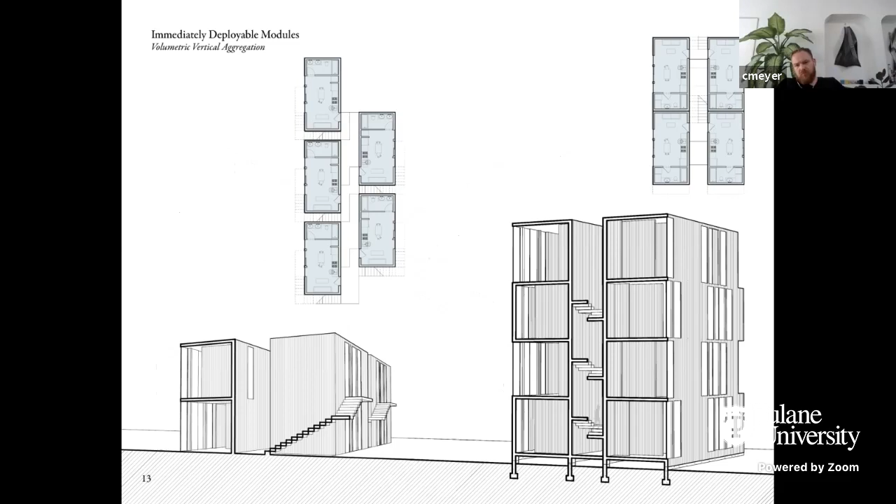And we were interested in seeing how this module would be applied on different scales and different densities. So this wasn't really the main focus of our project, but we were interested in seeing how this unit would work in high density scenarios.

But we felt like the most useful deployment of this unit would be the single household, either single studio or large family. So going back to that volumetric shell and how the interior arrangement can be configurable with those stud walls, you can see here in this scenario, this is a large family with 2 bedrooms, and you can accommodate larger scales of residents in the emergency.

But as we mentioned before, we wanted to provide the flexibility and adaptability for this module to be used in those typical immediate disaster ways. But our ultimate goal was this kind of permanent community. And that also relates to that very first idea of a circular economy, to make the use of CLT a little bit more affordable and viable.

Our idea is to create this kind of system of permanent living communities that work in tandem with CLT factories and that industry, so that they both become a bigger thing in the Gulf South.

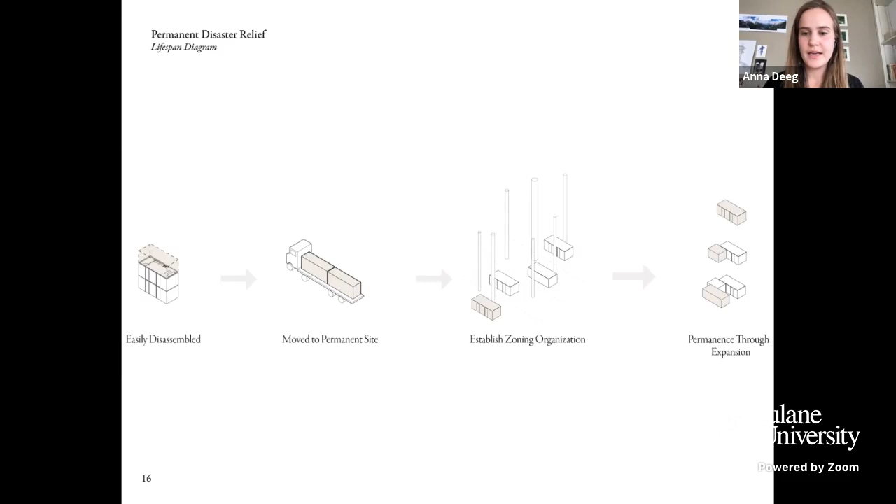So we're looking at Geneva State Forest as a site for doing this. And as you can start to see here in this diagram, taking perhaps those immediately used modules and transporting them to this more permanent site and establishing a community there. So this is sort of a rough site plan of what that looks like with the aggregation.

So the two main things driving this are the requirements of the household themselves. So if that studio apartment would just work for the couple or the single person who is displaced, then it can remain just as that single module, or as we're about to get into, that unit will be added to.

And the other main thing that we were thinking of, which brings in Geneva State Forest as our site a little bit more, was working into the forest management system that's already in place. Geneva State Forest has a 75-year rotation of work units.

And so talking about the lifeline, timeline of buildings, that kind of fits into this idea of how long a residential home could be here. So ideally it would fit right into that timeline, and we would work within their demolition, clearing, and growing of new wood.

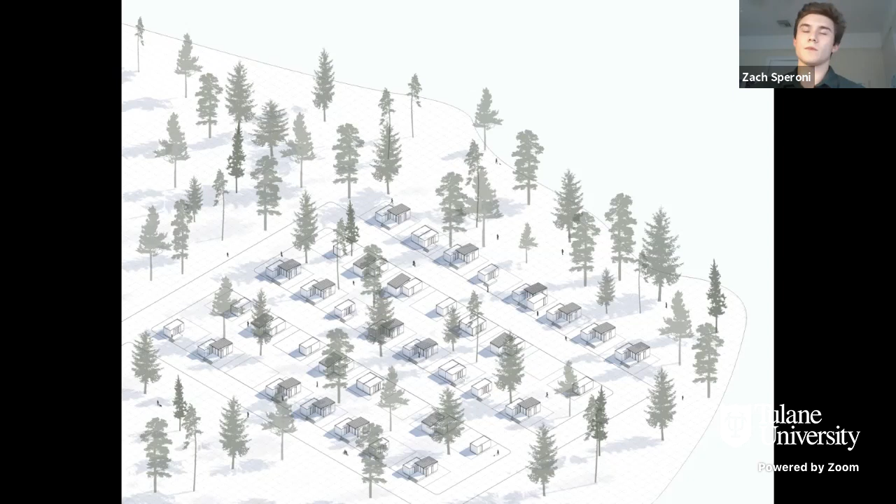This animation shows that growth, bringing volumetric units from a more urban site or a site affected by coastal flooding, and then seeing that user-end growth. We'll get into this later, but we have a kit of parts that residents can use to add spaces onto their house to accommodate different scales of residents.

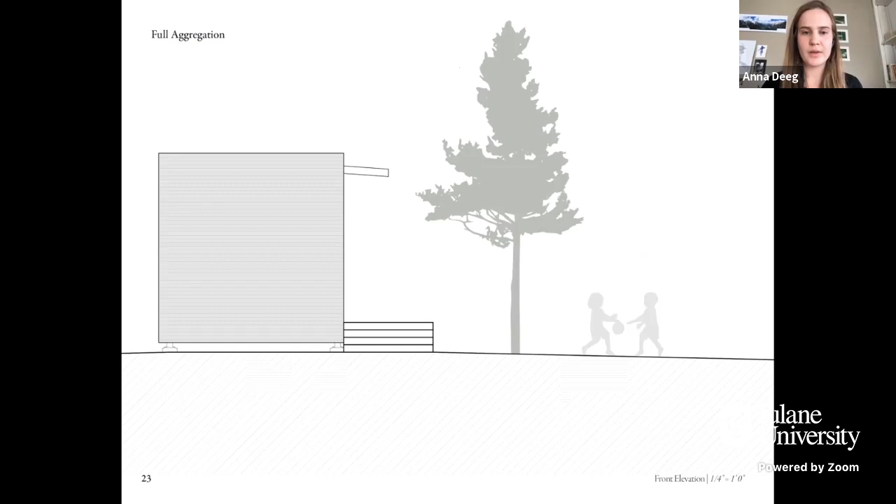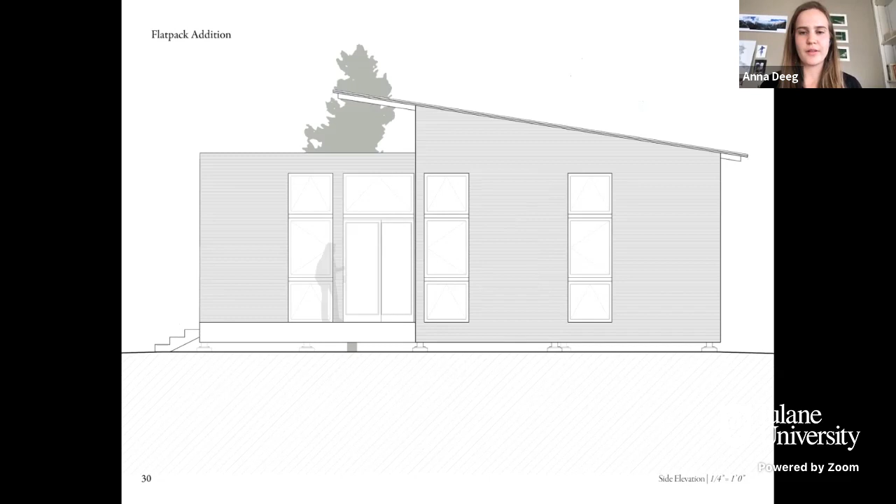This is an elevation of just that one volumetric with the flat pack, and then the full expression, and a section also, and the full expression. This elevation is of that front entrance, for the volumetric, the flat pack, and the full expression once more.

For the flat pack, as we mentioned before, the idea was to allow for some flexibility in price. We did some cost estimates, and the biggest factor for the flat pack was the price of labor. We thought of it as something that could involve the whole community, being that it's in this forest site—they could play a hand in the construction and expansion of their own home.

We also wanted to maximize and optimize the CLT used here. It has the same logic of openings being used as doors for that next expression, being floor to ceiling so we're not wasting any CLT. The roof is also made out of CLT, and it has glulam columns on the exterior. Those two are separated, so there's no thermal bridging.

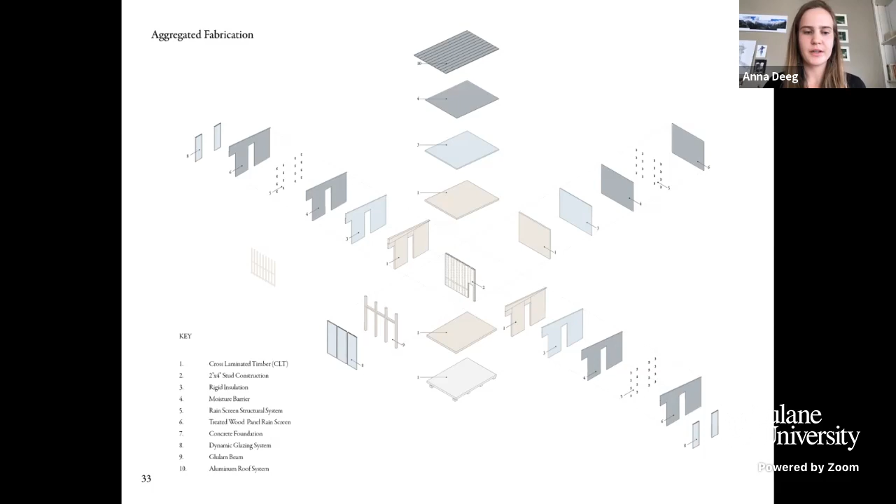This again is the wall assembly, which is the same system as the volumetric. The main programmatic difference between the flat pack module and the volumetric is that the volumetric module houses the kitchen and bathroom, which have wet wall components. Keeping that in the volumetric, simplifying it for immediate deployment, was important. But for expansion of bedrooms and living space, that didn't need as much infrastructure as bathrooms.

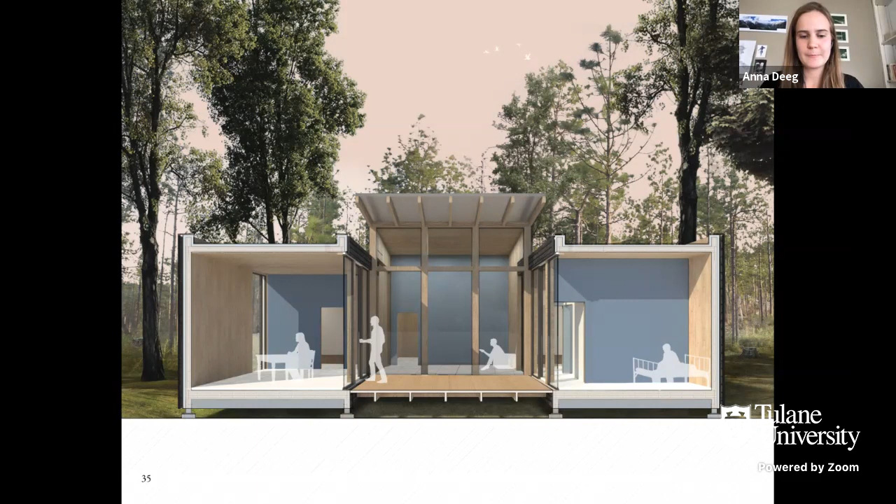So these are just some final images now—section perspectives, and then the whole site. And that's our presentation.

Very nice. There's something about the bucolic setting and the community build that it's got a real Usonian feel to it—the rise of the middle class here again. This work was quite nice. All the drawings were very much appreciated.

One thing in particular that has come up a little bit, but in yours it was strong: the studies you did incidentally to develop the possibilities for higher density. Thinking back to some we saw, the single greatest characteristic of CLT is that it combines enclosure and structure, with all of its other advantages. It has a robust ability to carry weight, so once you build these modules, you can stack them up. At some level, for temporary emergency housing maybe not, but to not think about it a little bit in terms of going up multiple floors seems like leaving something on the table that shouldn't be left. So I appreciate those speculations.

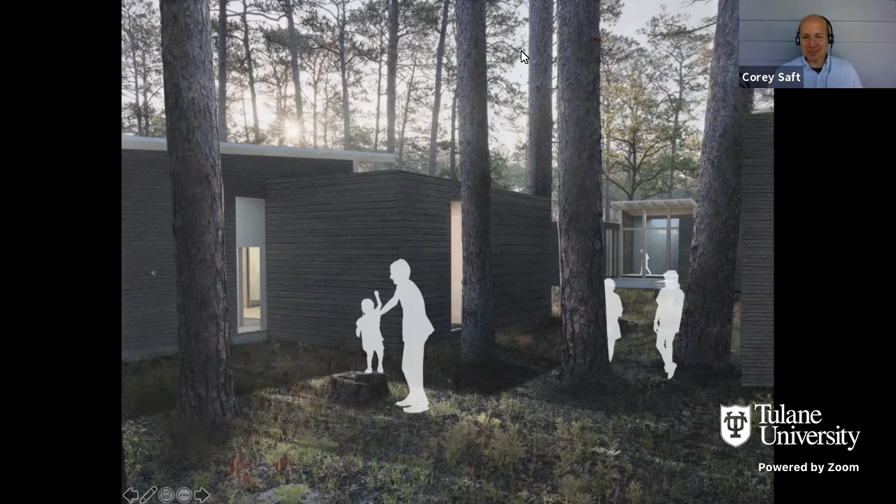I do realize, Susan, your point that sometimes leaving an urban environment you're used to, the rural condition can be as scary as an urban one is for someone who grew up in a rural condition. Corey, it's a funny thing.

We've been struggling with homelessness for many years in New York, and one of the things we found is that if you take a person from the Bronx and put them in a homeless shelter in Queens or Brooklyn, they may never have been there before. It may be the first time they've ever visited Brooklyn or Queens, and taking them out of their neighborhood is such a radical displacement that it exacerbates the problem.

So it's really a tough one. Yeah, I have a 3,000 acre property that I was doing a previous studio on. The property is owned by a billionaire philanthropist, and she can do anything she wants, of course. Hopefully I would like to engage her in the CLT conversation. The program we picked was for a camp for urban youth to come out into nature in the summer. It strikes me that Anna and Zach's project could really turn into some kind of retreat for supporting a more symbiotic relationship between rural and urban communities.

With Susan's comments, I think, on the relationship between mass production and handicraft or job creation - that's a really interesting problem, right? And it's true in all forms of prefabrication. The advent of robotics and all of this strips jobs away. So what we've been working on is this kind of...